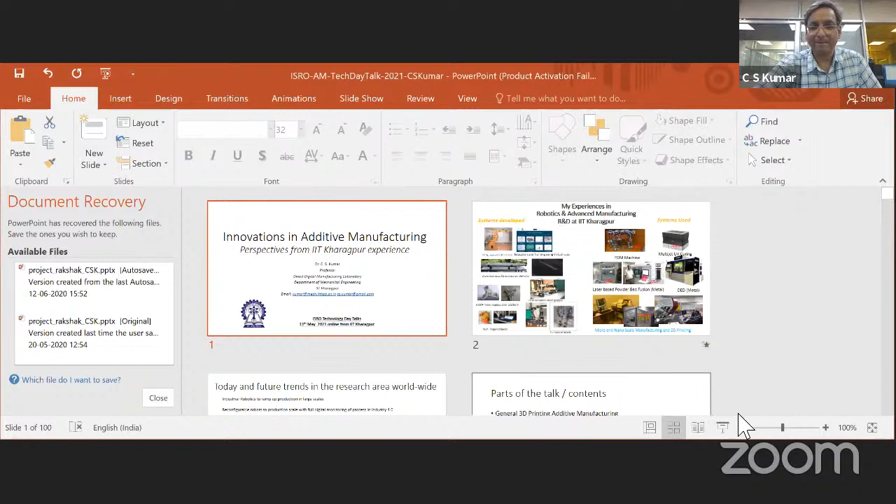Screen is probably a little bit cluttered. There's a lot of slides I've prepared for a 1 hour talk. Okay. Yeah. So this is the topic. I hope you're getting to see my first slide, the title slide. Yes, sir. Yeah. It's visible.

I called it ISRO Technology Day. It's actually the National Technology Day of ISRO, so I perhaps misuse the term. Let me introduce myself briefly. I am Professor C.S. Kumar from the Mechanical Engineering Department of IIT Kharagpur. I am a graduate of this institute in the year 1987.

After my schooling in 83, my first choice, like any young geek, was always the aerospace industry, and I literally fought with my dad that I wanted to join aerospace, but then manufacturing was just upcoming, and we were looking at aspects of doing manufacturing engineering, advanced manufacturing in mechanical. So that was the undergraduate program I joined as a BTech student way back in 1983. Providence took me through it.

And then after several years of work in basic manufacturing engineering, manufacturing science and engineering, where IIT Kharagpur happens to be the first institute which introduced this program at the undergraduate level, I went into robotics and automation. And about 12, 13 years ago, I got into additive manufacturing, due to an assignment that I had been given to work with, and I will talk about my experiences in that.

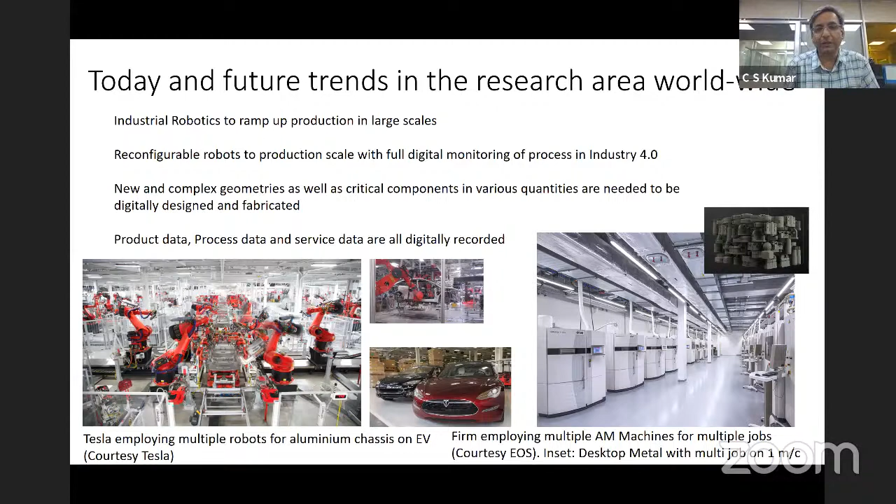So I will today talk generally about 3D printing, metal 3D printing, micro 3D printing, etc. So essentially here we are talking of additive manufacturing, which is also called 3D printing. There's a minor difference between the two. Additive is more like a process wherein you add material instead of removing material, and it actually helps a lot as compared to the traditional secondary manufacturing processes, wherein if you remove material, you incur wastage and you actually spend more energy in doing so. And that's why it is not so green in that sense. Okay.

That's why it is called an advanced manufacturing thing. You can also make very complex shapes, which otherwise traditional manufacturing machines, either a lathe-like machine or a milling-like machine or any combination of these, make very complex to do. And on top of it, like the example I've given, if you have multiple machines, you can work with multiple materials and you can expect different properties from those parts and products made. And you can have a lot of flexibility while doing so.

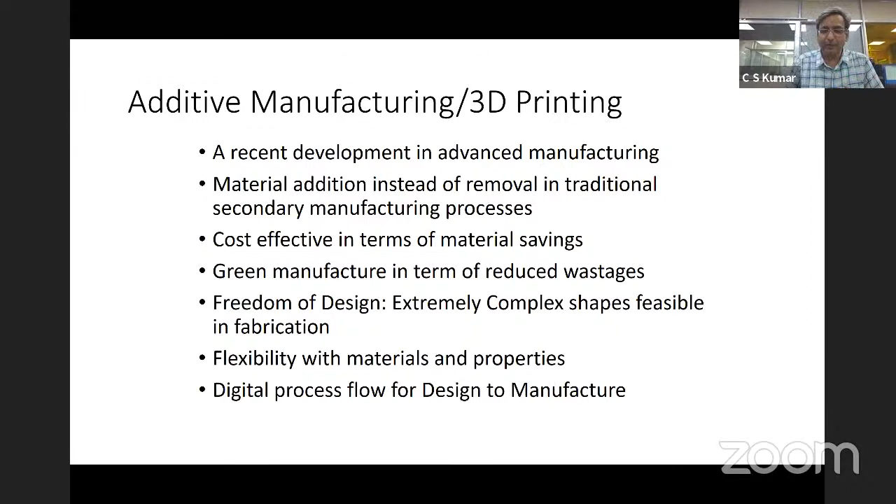And accordingly, you can actually configure or plan your design-to-manufacture process. And this entire thing has become digital thanks to the digital innovations that are taking place these days. So that is the driving thing which makes it possible these days.

I will not get much into this, but there are many families of additive manufacturing. In any typical course on additive manufacturing, we cover most of these. Here I will talk with respect to the one that we have on powder bed fusion, where we have had recent experiences. We do also have material jetting options and UV curing that I mentioned, but the more exciting things are happening in powder bed fusion. There are alternative technologies in sheet lamination, material extrusion, and also there is a directed energy deposition process, about which I will talk because we are getting into it also.

Then there is an 8th category, which is a hybrid category, which may be a mix of these, or they can mix with a subtractive process wherein you traditionally remove material. And that is getting a lot of attention because you have the benefits of both additive as well as traditional technologies, and you get a lot of new things that are happening. And I will touch upon it briefly today.

In general, the transitions are happening like this: you typically talk of digital transformation, wherein you take a CAD model. It would have traditionally gone through a rapid manufacturing process, either on a lathe or a milling-like machine, and then you take it through a heat treatment process and put it on maybe a non-traditional manufacturing process and get things like die inserts made. There are multiple stages you have to take it through.

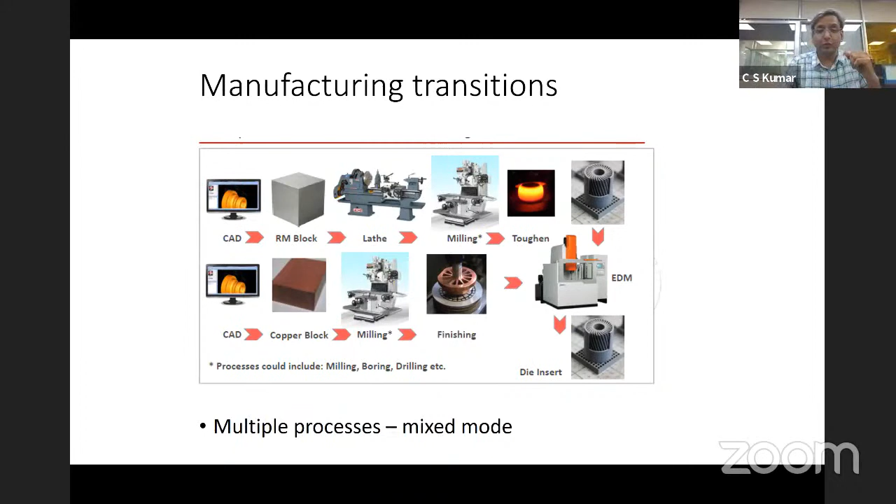So the digital era with 3D printing has actually a very wide spectrum of things. We at IIT Kharagpur have many machines of this kind. This is the initial machine which we called the M270. Then we had laser material processing in our laser lab. Then we have a robotics lab, and then this is the micro 3D printing facility that we have. We have some more, but I'm skipping some of these.

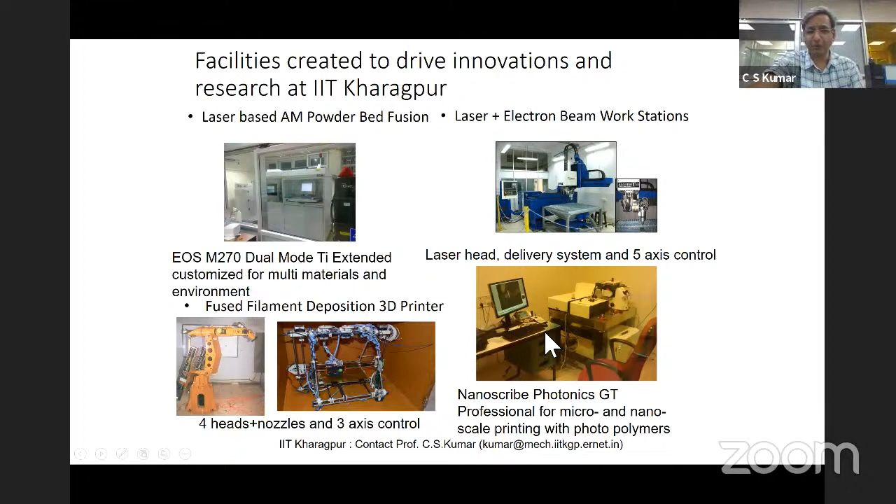I am also in charge of the direct digital manufacturing lab, which was set up in 2009. We installed the first metal 3D printer at that time, when people were hesitant to set it up at an academic institute. And more recently, in 2016, we had the microsystems lab also. And only recently, the one from 2009 has been upgraded to a more advanced system.

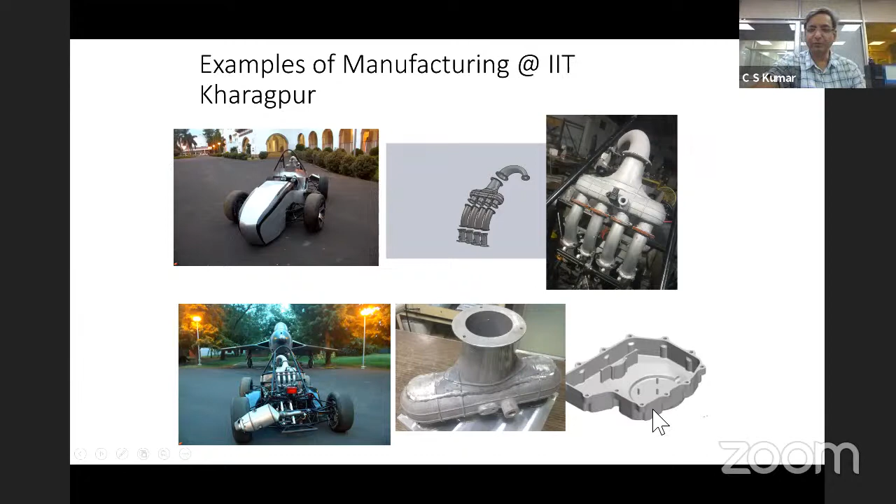We have already made parts for automotive applications, like our students developed these for Formula cars. This is the intake manifold, made out of aluminum. And the chassis, this is for a Formula car wherein this has to be custom designed, and it was fabricated in our lab and made out of aluminum. Its sump was made out of steel. This was also done in the lab.

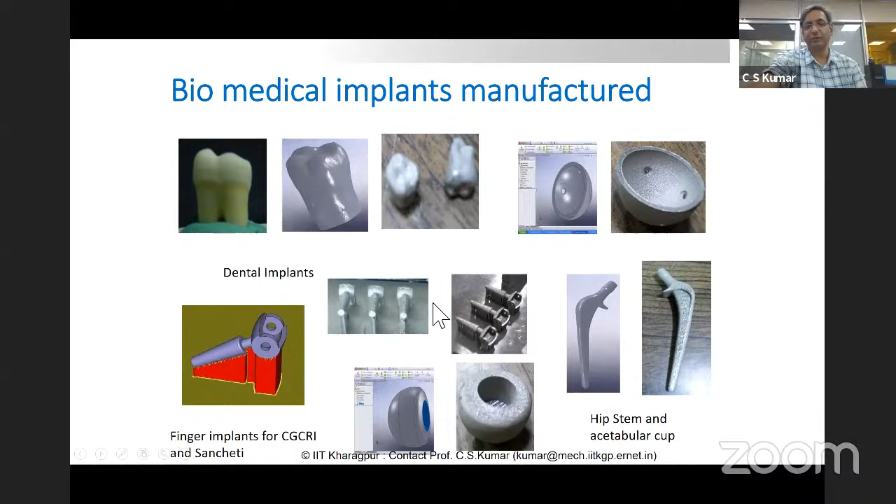You can also do biomedical applications like hip stem implants. These are finger implants. We got some requests from various organizations and we made them. This is what I talked about, the ventricular assist device for a heart pump. And this is made in titanium so that it can be used for biocompatible applications.

So all of these follow what we call a powder bed fusion process. Since I'm focusing mostly on metals, metals can be used directly in real applications in a final product. So there are different ways of doing it. One is liquid phase sintering and another is the full melting process. The other processes are not really as effective, like solid state sintering or chemically induced binding. These are typically used in ceramics, an upcoming technology, but they don't deliver the strength we look for.

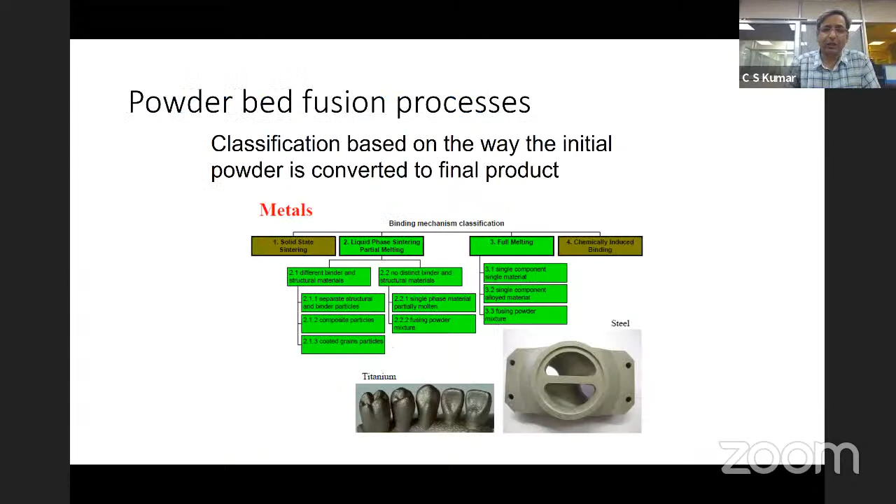But looking at the most viable and commercially grown systems, they could be either liquid phase sintering or full melting. We work mostly on full melting based systems. We use a technology called direct metal laser sintering, DMLS in short. Basically, we do layer by layer addition, wherein at one end you have powder, which is passed on to a build chamber through a recoater.

The recoater puts the powder on a bed, and there's a laser beam, typically of very small diameter, about 80 to 100 microns, and it may have a power ranging from 200 to 400 or even 1000 watts. When you apply it on a very small area, the energy density is so high that it melts the powder, and when you switch it off, it very rapidly cools and binds to the substrate, making a solid part on the previous layer. Then you do this layer by layer, lowering the platform and letting new powder be spread on top. So this is how it goes.

We typically start with a CAD model, then you have powder, and the CAD model can be very complex. The complexity does not matter. Then you bring it to the build chamber. In the build chamber, the powder is first coated by a recoater in a thin layer of a few microns.

And then use a laser beam to melt and solidify only that portion of the CAD model which is relevant. The rest all is left untouched. And then when the material melts and solidifies, you go back and you put another layer on top of it, and you continue this process layer by layer, and as you keep on adding, you will complete the part like this.

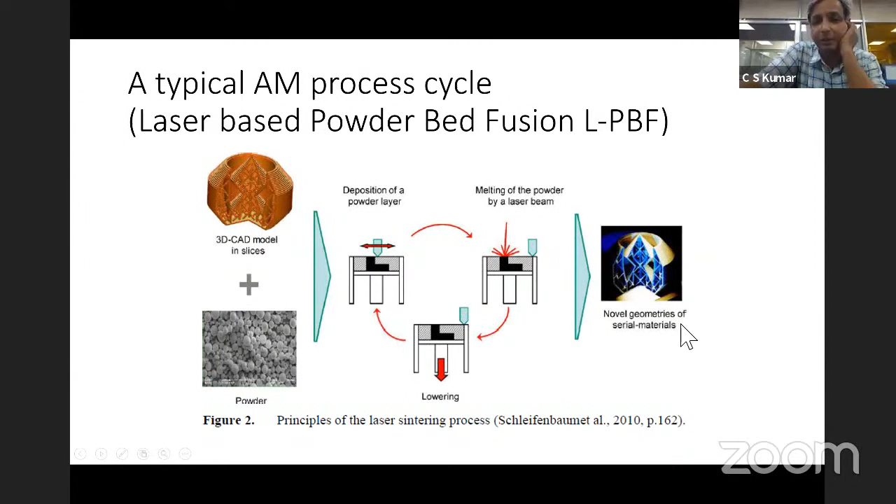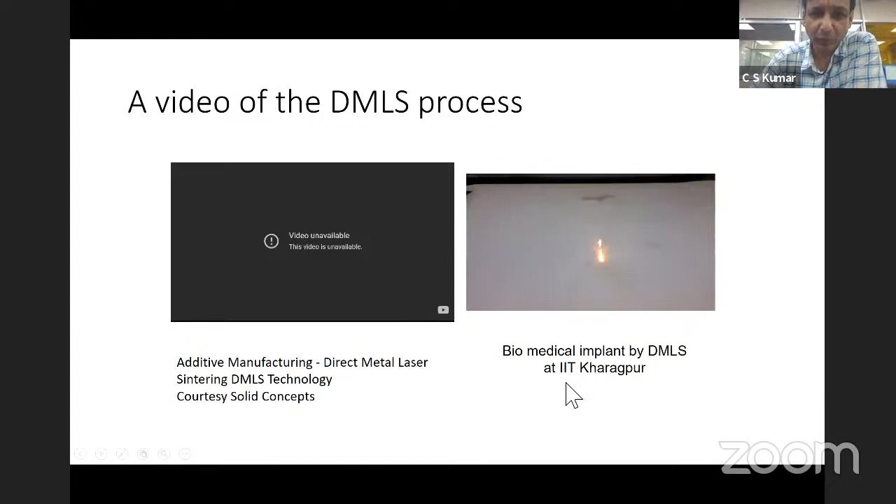This is what we call additive manufacturing, which is a very state-of-the-art manufacturing. It was earlier called rapid prototyping. It was earlier done for making parts with very complex geometry. It may have inside structures, like there may be paths or cavities or even channels which may be used for cooling and other things. And you can make them in this process very easily.

Conventionally, it is very difficult to make dies and inserts for achieving this. In an additive process, it's much easier to do that. What I've shown here was for metals. You could work on materials like stainless steel or reactive materials like titanium or even aluminum, or high strength materials like cobalt chrome or H13 steels, etc. There are people who have worked with precious materials like gold, etc.

There is also equivalent work going on polymers, which I will not touch upon. I think there is a separate talk on that. A typical flow would be to take a CAD model from a software. Then from the CAD model, we create an STL file, which is a set of triangles which represent the outer surface; it's a boundary representation model. And from there, you slice this into a format wherein you do it layer by layer.

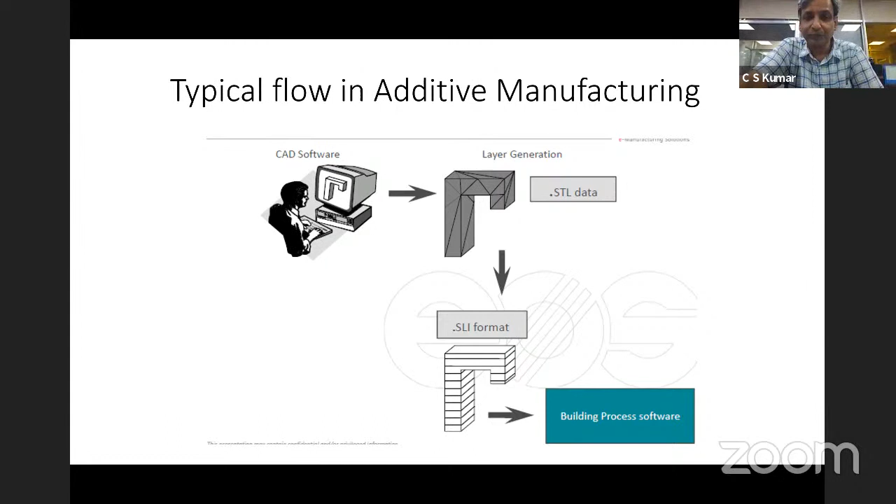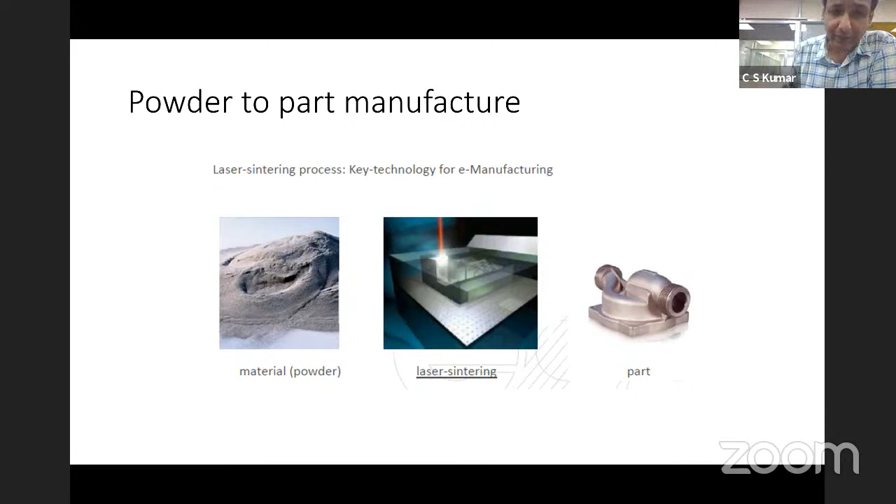So our machine being from EOS, these are examples I've taken from there. So you can actually make a complex part like this, and you can see how it is being built here. In the interest of time, I will skip through some of these rather fast. So this is where you start with the materials, powders, and go to the part. This is also called selective laser sintering. Some call it direct metal laser sintering, and so on.

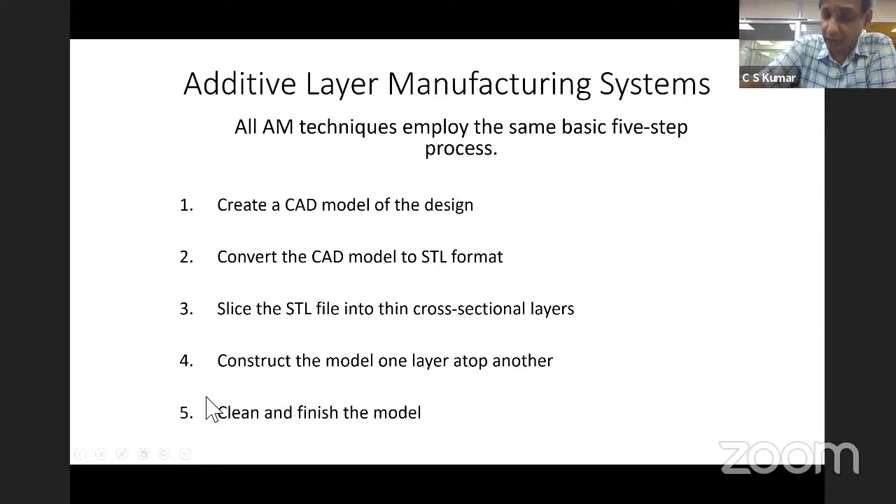Just to give you an idea about what happens in the software stages, you might pick up the model sometimes from very complex shapes. Like a CT scan can actually create data of, let's say, a human implant or skull data or things like that, a human orthopedic implant, which can be very complex in shape. You may not have a well-known geometry to define it beforehand. So the CT scan actually extracts that, and then you can recreate the geometry in 3D and bring it into a CAD software by reverse engineering or redesign, and then you can optimize and create a shape.

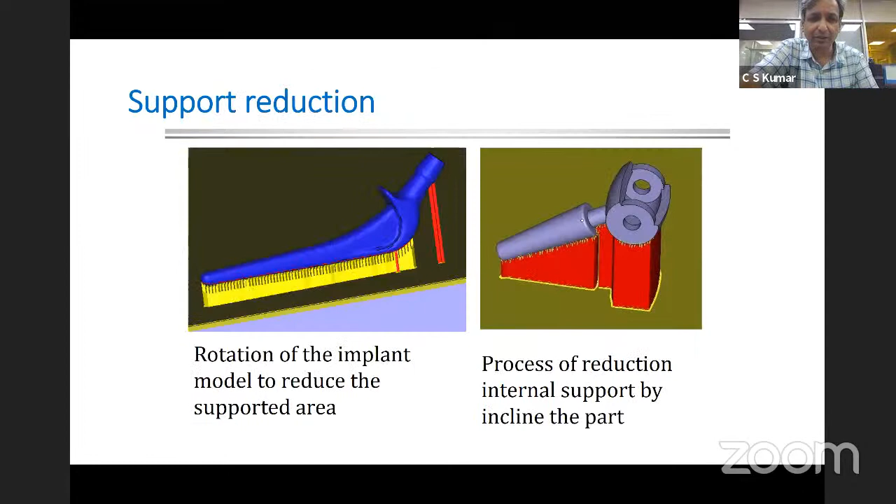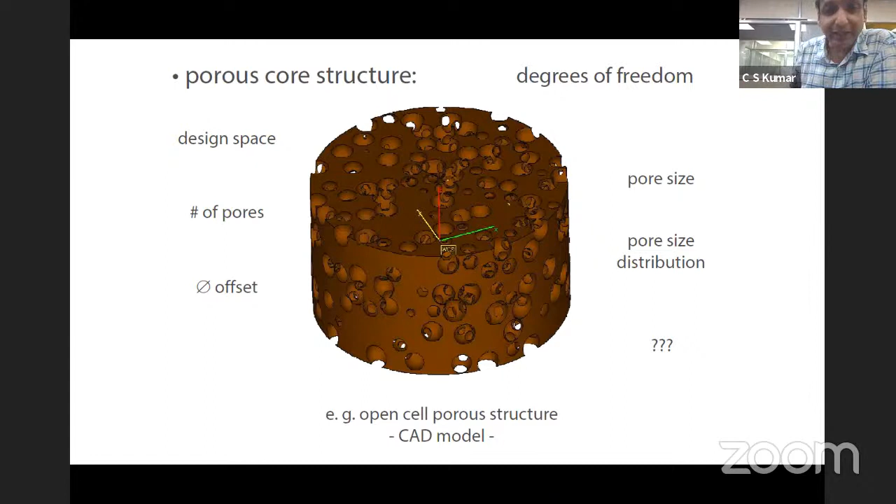This is an example of a porous structure wherein you can create pores inside a material. You can control the shape of the pores by bringing in a CAD model. This is called hybrid modeling. And you can bring in, let's say, something like bifurcating arteries, embed that into a design, create a porous structure very easily and then just pass it on to manufacturing. These are very useful when you're working with biomedical systems, wherein the shapes and structures are very odd, and sometimes you need the porosity because bone or tissue structures grow into them and make the structure more stable for long life applications.

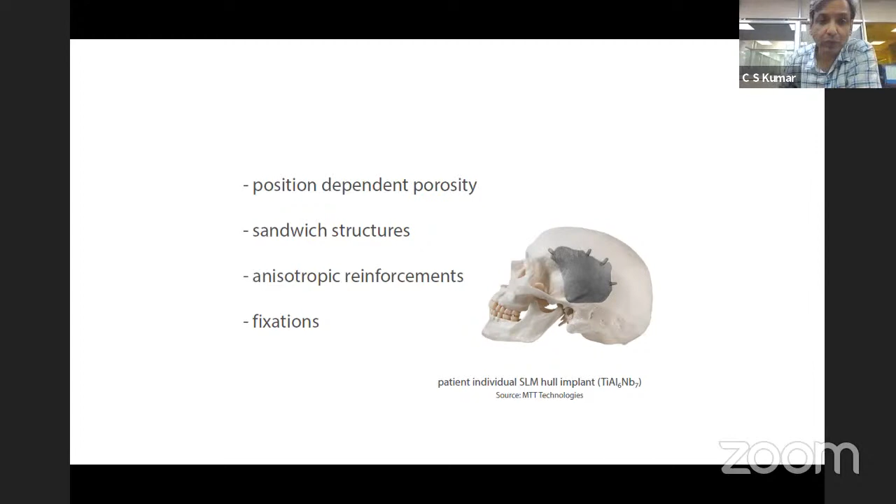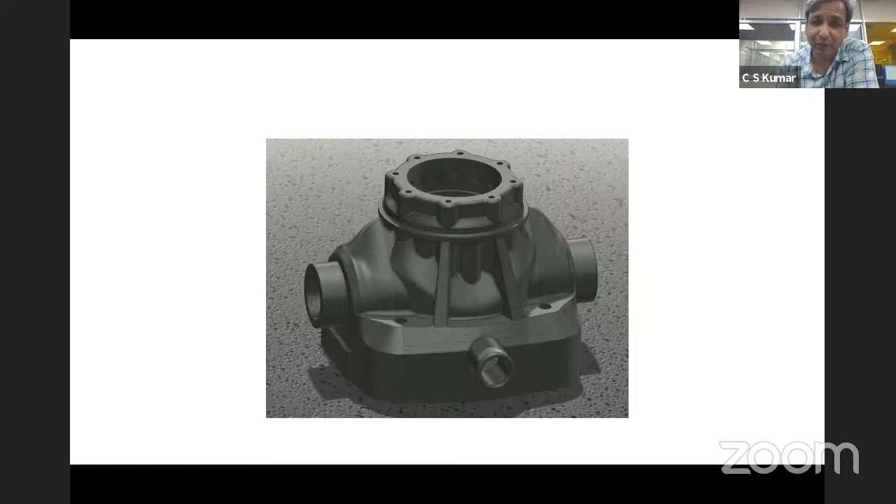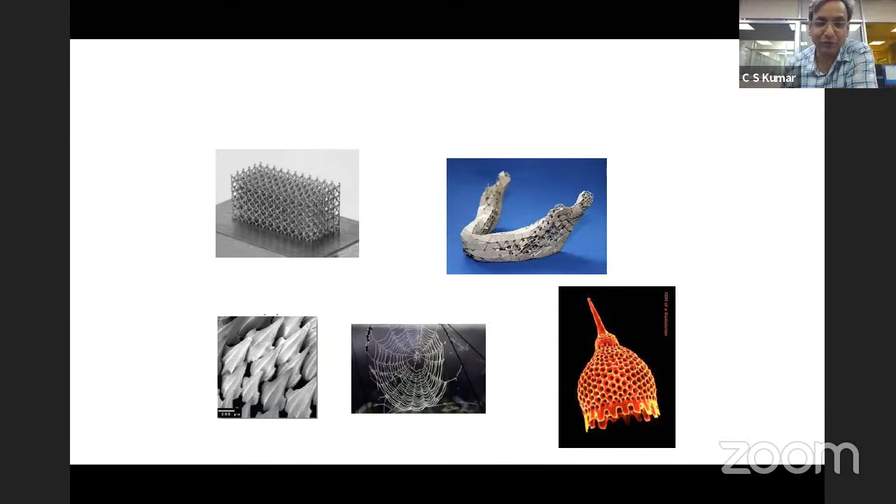These are innovative structures people make, sometimes for artistic applications, but you can see how a spider-like web is useful for capturing something. So they actually make it additively. That's a very good example of how additive structures are made for real-life usage. This is what has led to what is called topology optimization. Topology optimization allows us to keep minimal material and give the adequate strength that we are looking for. Here is an example of a frame typically used for aerospace structures, because they want to reduce the dead weight carried in the aircraft, and you can always optimize that by these methods.

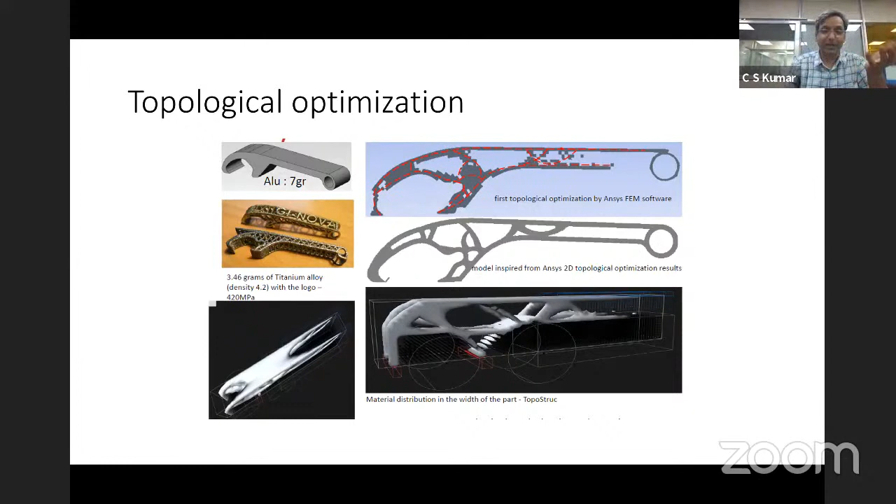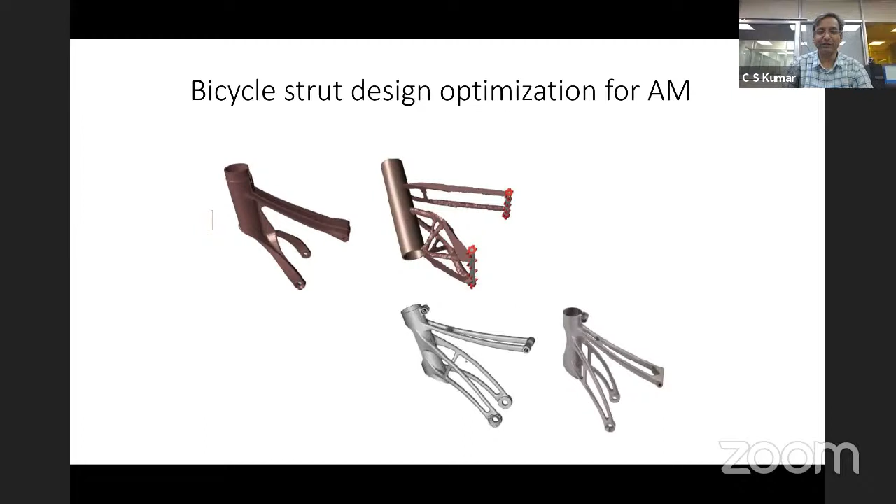Usually we do it by the FEM method. Where there is no stress and the material is not contributing to the load, you can remove it and get a shape, and you can save a lot on material in this process. This is a titanium bicycle frame made by Renishaw for their bicycle. You can see this in videos. They made a very simple, very lightweight one. I have seen this bicycle; you can literally lift it up with 2 fingers. It is so light. Of course, it's made of a material like titanium.

This is another one to generate a shape. You can see the top here. This is a solid conventionally manufactured thing, but if you topology optimize it, you can get a very complex shape, much lighter in material.

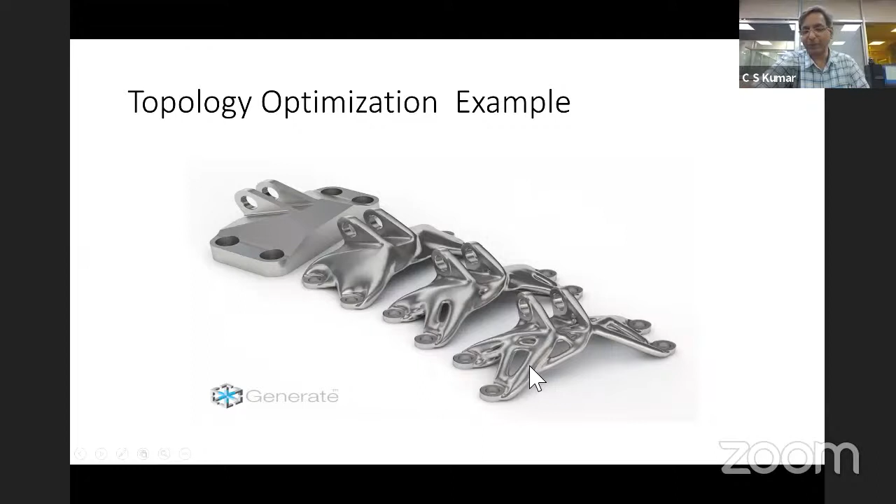Another such example, which is floated around. These are all picked up from industry examples. We haven't done these here.

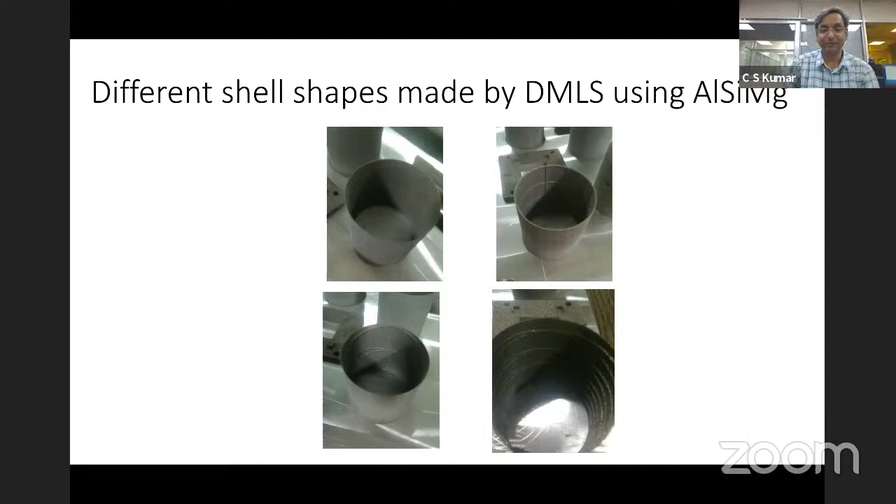So you can also do it for supports like this and create support optimization in this process. This has led to what is known as a product cycle, which is an additive manufacturing process chain. Today, many people are involved in this and they have modeling and simulation included into some of this. I thought of bringing that in this talk, but given this time constraint, I'm going to cut it short.

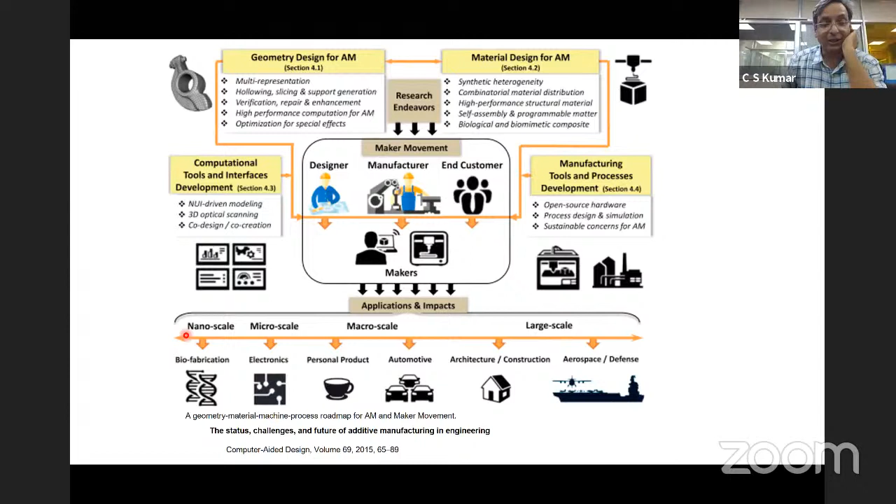I think I will overshoot time a little bit beyond 3, but then I'll try my best to cover a few of that in the interest of everyone.

So what it has led to is we are going back traditionally to what is called craft manufacturing, wherein the consumer and the artisan work together to make a product. When the industrial revolution made these go through factories and standardized products, today direct digital manufacturing brings personalized products in a local manner, and it got facilitated because of these additive processes.

So when we do this, in a lab like our institute, we look at a variety of things when we implement it. What we do at our institute, we look at a typical process and say what are the contributing factors in it, and each of these factors we then thoroughly experiment with to optimize the product. Like in this case, if I'm doing anything with a laser-based process, powder bed fusion, it depends on things like the laser power, the scan speed, the hatching distance, and scan strategy.

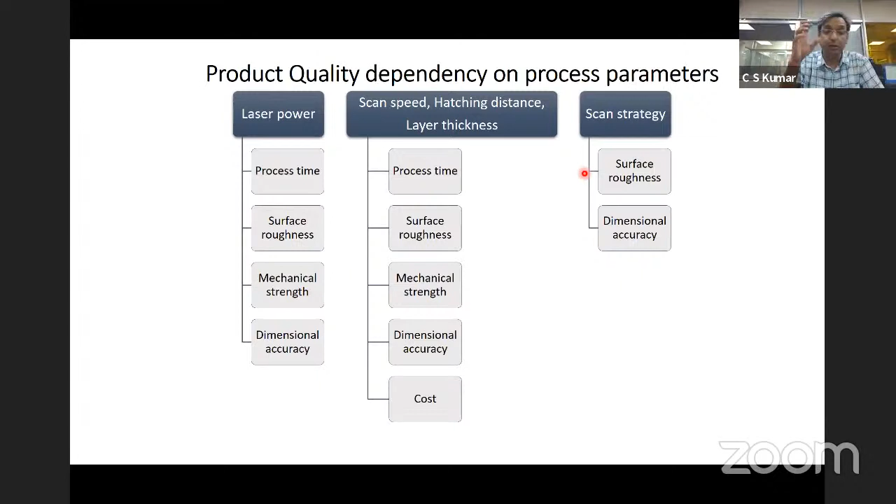And they influence the process time, the surface roughness, the mechanical strength, dimensional accuracy, and other kinds of aspects of the product. And then if you interplay between these, we know which is the right combination of these parameters which will give you the best quality output. So we create models of this by laser material interactions, and these allow us to actually get deep into what will be the final property that you will achieve.

So there's a lot of optimization involved in it. Sometimes you increase the power, sometimes you increase the deposition rate, sometimes you increase the feature quality, and there's an interplay between this, and you have to choose that sweet spot which brings up what we call a process map, and that process map becomes relevant for us to implement as a recipe which goes to the industry, and we are involved in doing that.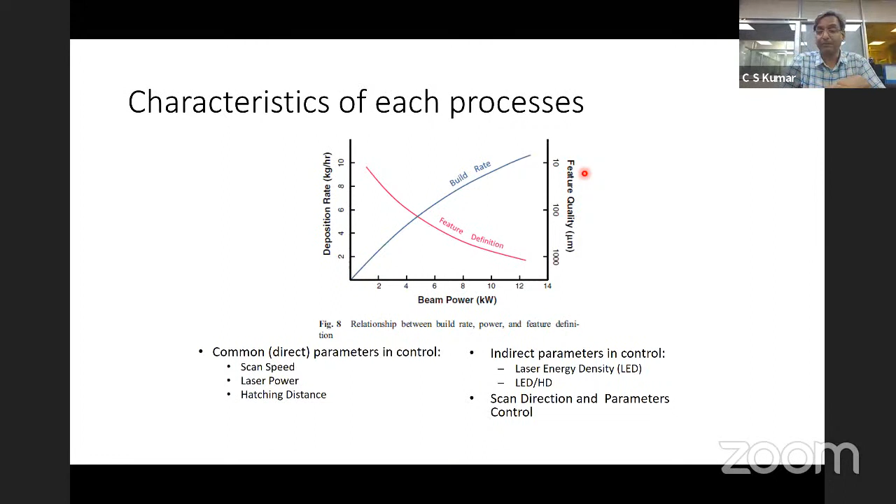So to do that in our lab, we have used these machines and we have rigged them up with all kinds of monitoring processes, which allows us to say what happens inside the process when the part is being produced. So towards that, we have this laser-based manufacturing process that you see.

There are snapshots that we take through a thermal camera, and we can detect from that what is happening in the process. Sometimes it does not go as well as planned, and it may introduce defects. So we look at defects by looking at the intensity of the laser energy, which varies with the various process parameters that we change, or the spatter, which shows what height that plume is, and whether it is ejecting too many particles, or it's likely to create more errors in the job. Like there may be pores, or there may be lack of fusion faults. So we need to capture them early.

So this was what we did earlier, and we got some interesting results out of it. Later on, we went into upgrading the machine so that we can capture these more systematically in a very professional manner. So the upgraded machine has a camera which captures this at one end, and it has a set of laser diodes that we see here, which monitor the back radiation, and they give an impression of what the temperature is on the build screen.

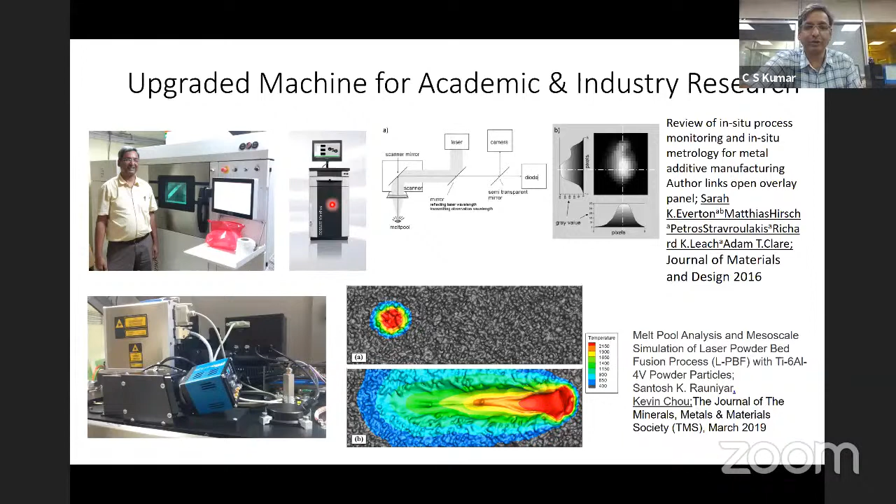And then you can reconstruct and see how the melt pool is forming, and that melt pool forming and cooling rate will tell us what property you are going to achieve in the process. So we monitor them through devices like this, which allow us to capture all this. So this is what we call in situ monitoring.

Like you see a typical thing here, I'm doing a job of a BHEL turbine, which is a closed impeller. And while it is being manufactured, we collect data of it through a camera, the CMOS camera, which gives us a picture of the bed, as well as a scanner, which tells us what the temperature is. And then we reconstruct that on the right-hand side here as a video.

This is playing a video, I think. I don't know why it's not coming here immediately. Okay, so we can reconstruct that at this side. Here is the video, yeah.

So we actually capture here the various backscatter images, the radiation on this screen, and here is the thing. This is constructed from whatever is happening on the job, and you can do it layer by layer. And when you capture this live, we can then use it for reconstructing the job and look at whether there are possible defects. So this is how we started.

We started with a CAD model of an impeller here. It had internal support structures, and these support structures are needed because the manufacturing system will fail otherwise. But when you make them, you don't like to keep those structures. You have to mill them out or remove them.

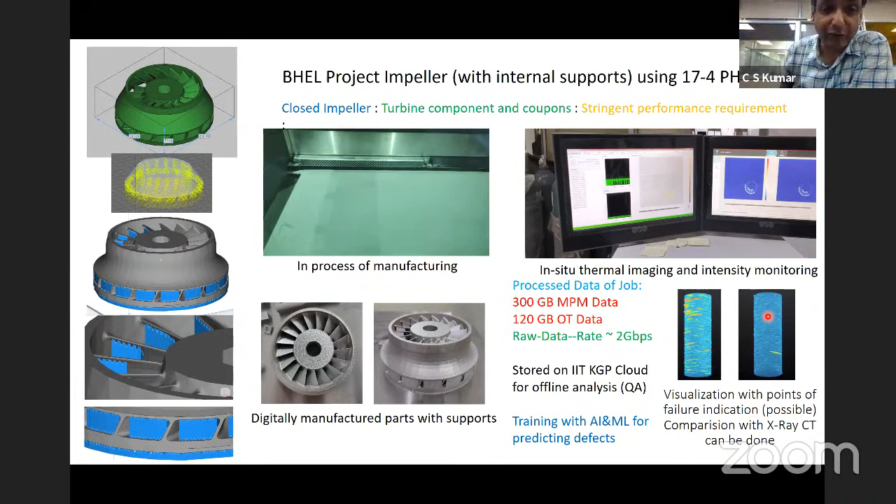They create a problem. So we collect all this data, analyze, and see where there are possible hotspots or things which may cause problems, because these impellers by BHEL will be used in plants, and they are supposed to have a long life of 15, 20, maybe even 40 years in gas turbines, and you cannot afford them to fail. So you need to have a very perfect part being made here. So what we do is what is known as optical tomography.

We construct the body. Let's say this is a coupon that we made, and we know what happens at the base as it builds. So this is a reconstructed image. And in the reconstructed image, we know at the interface between the support and the body, there is a lot of high energy temperature developed there, and it is prone to failure at that point. So we are devising ways of minimizing this kind of thing for when a body is put to use.

So we reconstructed for the same job that we see. Since we did this, we could actually build this up. This is not on the same scale as what you saw there, but I can see here the supports as well as the internal ones, and I can examine this at any cross section and then come up with alternative recipes to achieve this. This is an example which shows where the likely hotspots and chances of having defects inside the part are.

As I said, if I put this to use in real life applications, you don't want this part to fail. It has to withstand a long life of maybe 40, 50 years in turbines, and the failure expectations are very low there. So it's pretty challenging to do it by this method.

We depend a lot on international technology, but hoping that by doing this, we will be actually coming up with our own technologies to help this out. While this is a technology, what I call as the laser powder bed fusion, there's an alternative technology that we are exploring, and I mentioned there is what is called as direct energy deposition.

Direct energy deposition here allows us to also deposit the metals along with the material from a nozzle, as well as from a laser going along with it. This is not a powder bed system, and it is something which can create odd shapes. This machine we are just getting, it somehow could not be installed due to certain problems that we had in our delivery. On the right side, there is also something which is a similar kind from the same company, which makes printed electronics. We don't have this at our institute, but I will talk about something related to it in a few minutes.

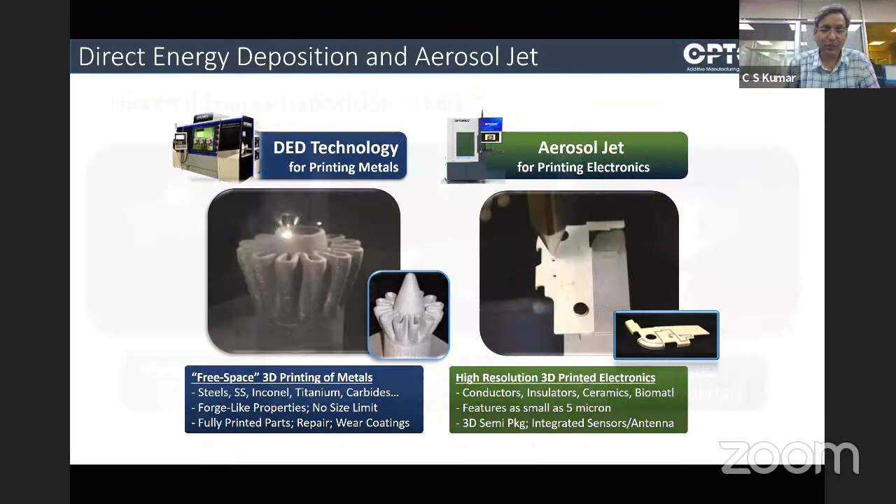So this is typically you fabricate here with the machine that we have. It uses something called LENS technology, that is laser engineered net shaping. They trademark that like DMLS, and then that can make parts on complex geometries like this. This is a fabrication application. You could also use it for repair. If something is damaged, you can only fill up that part which is damaged and repair it. You could do a hybrid process wherein you can make and machine it also. And that's what we have actually procured in our lab. It unfortunately could not be installed because something happened during shipment, and that is going on right now.

This is the repair process, how it is being done. Okay. And this is a hybrid process wherein you actually manufacture and also machine after that. Once this is completed, machining, this is a deposition process. After this, I think you will see a machining process also taking over on this. You can create a complex shape, and then you will see here a machining also done to remove all the excess material, and you'll get a good surface finish also here.

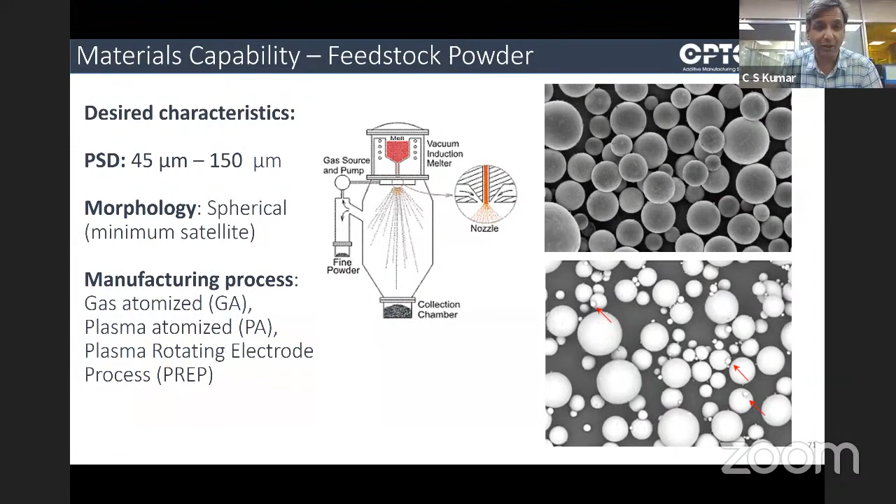So it is generally done in controlled and inert atmospheres. This is what we have at our lab. We got it in our advanced manufacturing center. Yeah, it's not yet installed for functional, but we are already practicing with its software and working with it with several scholars working on it. They have a lot of capability of bringing in different kind of materials. Generally, we use powders of different kinds. Here, the powder sizes are a little big, and build rates are also very fast as a consequence. So you can actually work with, again, same materials like stainless steel, nickel, copper, carbides, and titanium and other materials also, which is now happening.

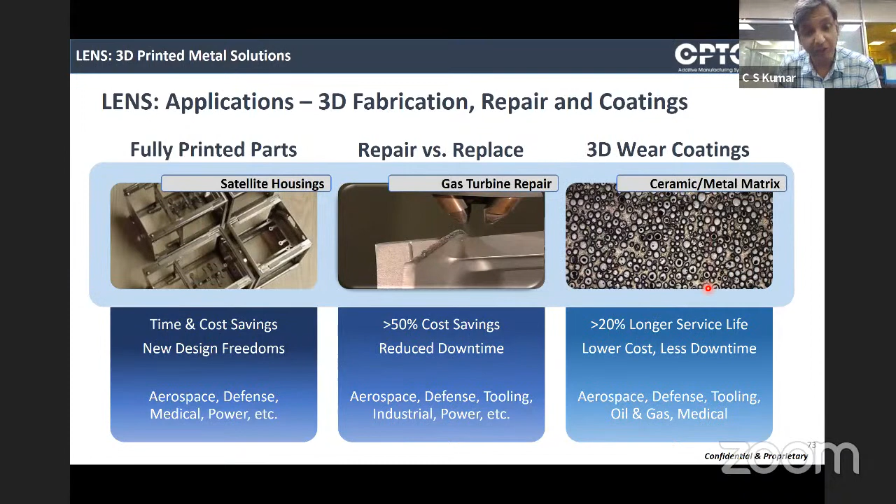Here are a few examples of these. People have used it for satellite housings. I heard ISRO is having some of these done here, not in our center, but elsewhere. Then repair and replacement, it is possible. And you can have metal matrix components also. You can mix materials and create in this also. That is another advantage of this process. It allows us to make many parts of extreme complexity. Conventionally, it is otherwise not easy to make.

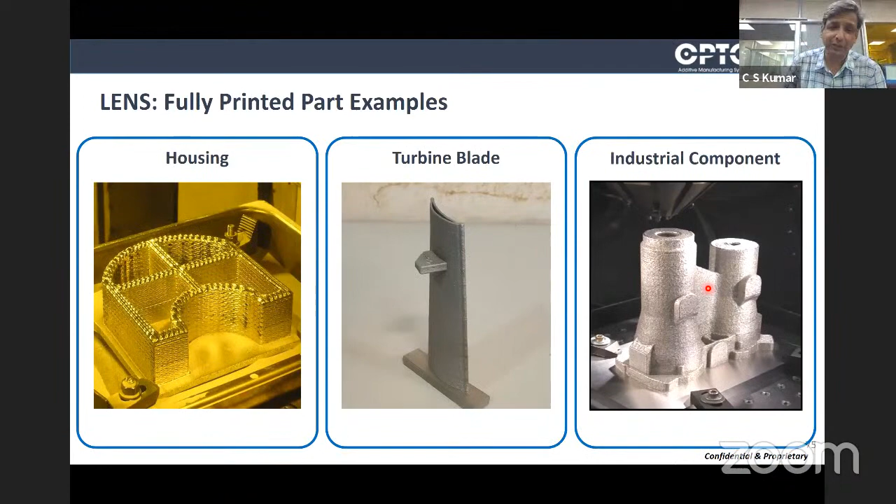So here again, similarly, housing, turbine blades, industrial components. These are generally you'll get very bad surface finish here too, like in powder bed systems. But if you have a hybrid system, you can machine it and get very good things here also, like here. Few more examples of this kind. These slides are from the company Optomec. I thank them for providing these slides because our machine is not yet available, operational. New materials are also being developed on this. And you can have carbon nanotubes, CNTs, carbon nanotube reinforced nickel alloys, boron reinforced titanium alloys, and all possible on these machines also.

Then I talked about printed electronics. Today you can actually print something on electronic materials, you can make sensors, you could do packaging, you could do antenna. We tried to do this with the FDM process, but there are a lot of things we can do internally with similar processes also. You can actually put in ink onto materials, and the inks, conductive inks, or they could be also materials of different kind, which can mix with the different matrix, and you can have electronics also happening in this process. So these are called electronic ink, which are actually small droplets which are aerodynamically focused, and aerosol jets are deposited, and you can create these also. This is another innovation that has taken place. It is coming from this company called Optomec.

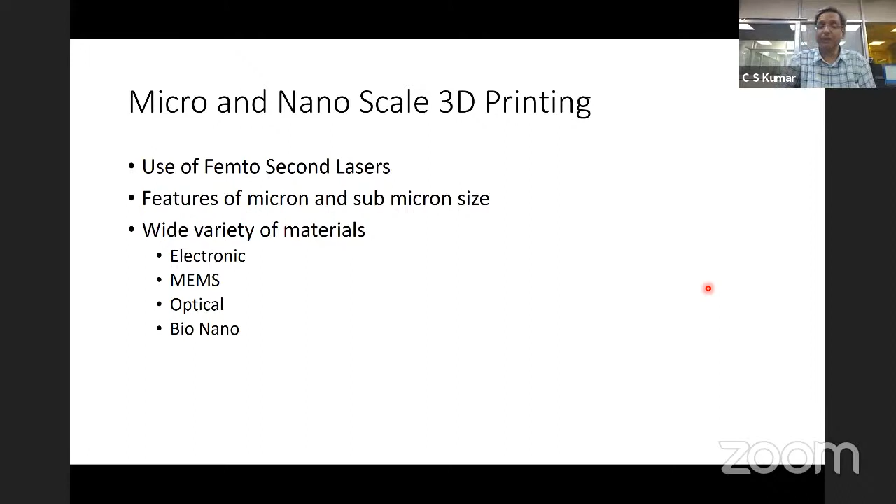What we do at IIT is we work at micro and nano scale. Maybe I'll just take another 3-4 minutes and wrap this up. We can print things using femtosecond lasers and make parts at extremely small scales. I call that micro and nano scale printing. We can use it for various materials, not necessarily metallic ones like I mentioned. They can be electronics, they could be on MEMS, they could be optical, and even bio nanomaterials.

This is a setup which we have got from Nanoscribe, a German company, wherein you can actually achieve feature sizes of the order of 1 micron, and the resolution is down to 200 nanometer, which is the feature of the laser that is used here.

So here are 3D scaffolds made at nanoscales. Their applications tend to be like scaffolds for cells, which may be used for capturing bioorganisms like they do in COVID or other things, and then they do tests to characterize what it is. It could be used for micro-optics, microfluidics, MEMS applications, maskless photolithography, or, most popular, 3D photonics and wire bonding in optical integration.

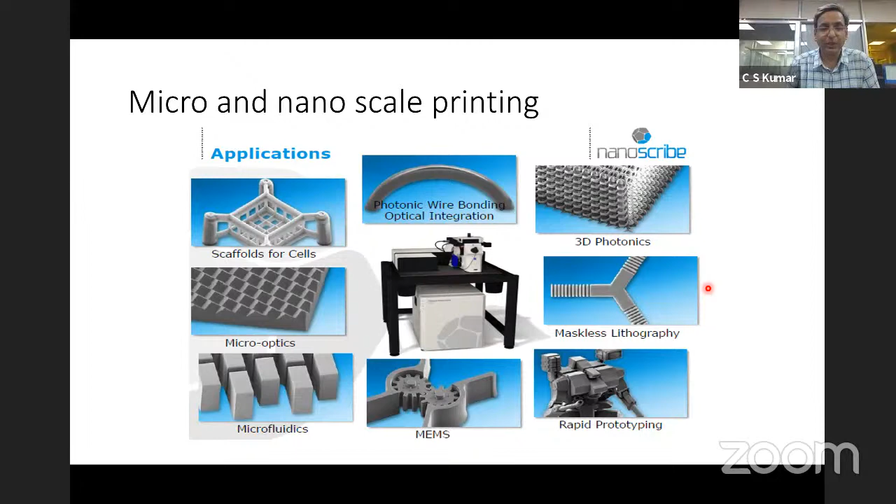So it uses a technology called direct laser writing, wherein you focus a small beam of light and you modulate its intensity and amplitude by a process called 2-photon polymerization. It's a near infrared laser having a wavelength of about 760 to 780 nanometer, and at half its wavelength you get its resolution. You can work with photoresists, positive and negative, and you can write on top or use a dip-in laser process. The voxel size is 200 by 200 by 300 nanometer, and you can directly build parts in 3D.

There are people who worked on this and made micro robots, like ETH Zurich has made micro robots which can swim in the body and deliver drugs at remote places for cancer-like treatment, etc. These are magnetically guided robots. We are trying to build some such things. Whenever you make these, you make a large number of them in the same build, and they can be done very easily on this. These are called magnetic helical micro machines. They can be fabricated, and we have been making some of these in our lab.

Here is how this thing works. This one I picked up from the internet. Here is an example of how this works. Cut down the sound.

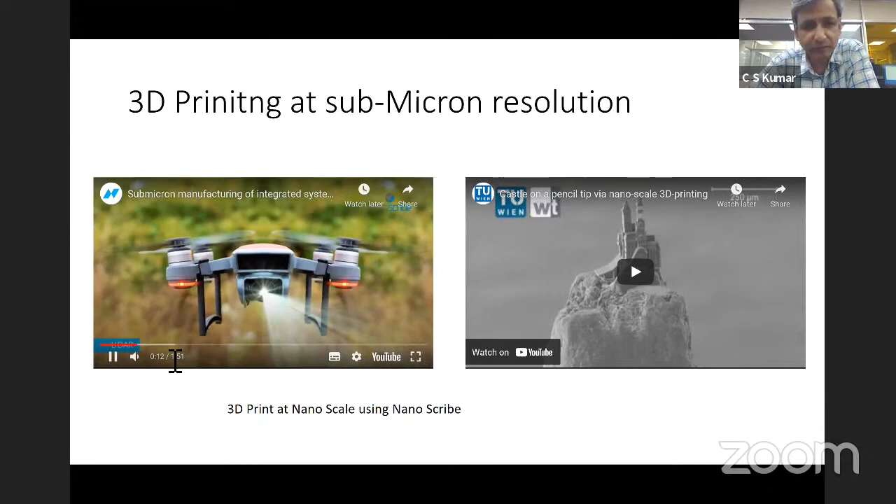3D printed. The miniaturization of optical and mechanical components, as well as fully integrated devices, can bring great benefits. Today, additive manufacturing.

So you can actually print a structure on top of a chip, and you can create optocouplers on the chip.

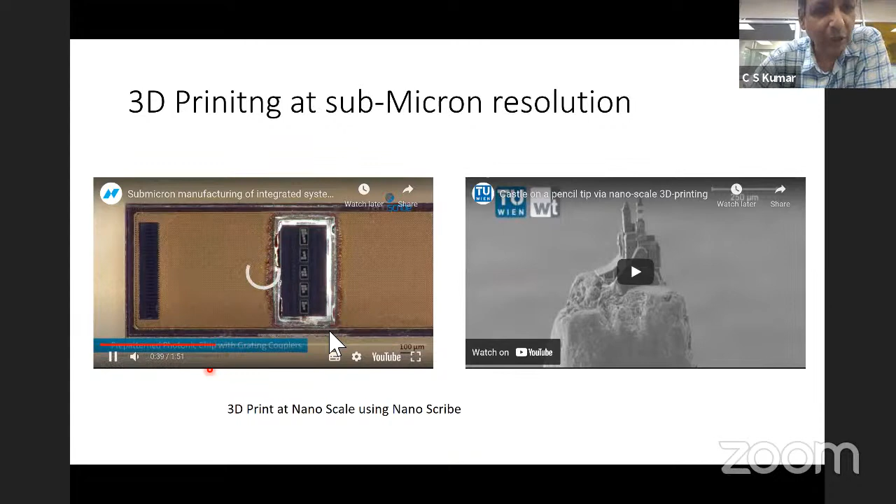Okay, I think the internet is slow, it actually makes some of these videos a little slow. You can check videos on this on the internet. There is another example of how this has been used to build a small castle-like thing.

The following video shows 3D printing of a castle via multiphoton polymerization technique, also called laser-based 3D printing. This was done at TU Wien, Austria. The laser scans through the volume of photosensitive material. Locally induced photopolymerization solidifies material in accordance with the 3D model. Once a layer is finished, the laser focal plane moves to the next layer. The true 3D capability of the method eliminates the need to deposit material layer by layer. Due to non-linear absorption, spatial resolution in the submicron range can be achieved. Scanning electron microscope image of a castle printed onto the tip of a pencil.

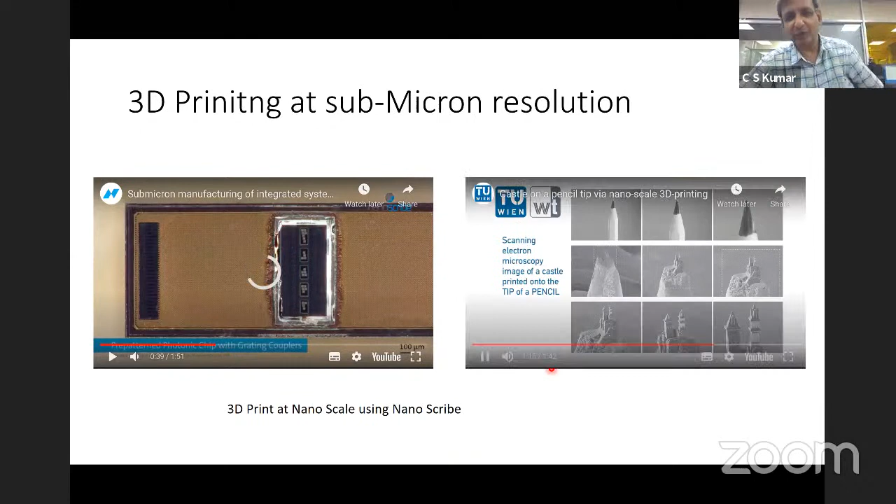So this is to give you an idea of how they make things at such small scales. Okay. For lack of time, I'm trying to skip some of these. So what we do with such machines is we are making micro nano robotic systems, tips of AFM manipulators. We want to use this with micro platforms. This is because of my robotics background. This is a part of a swimmer that we are making here.

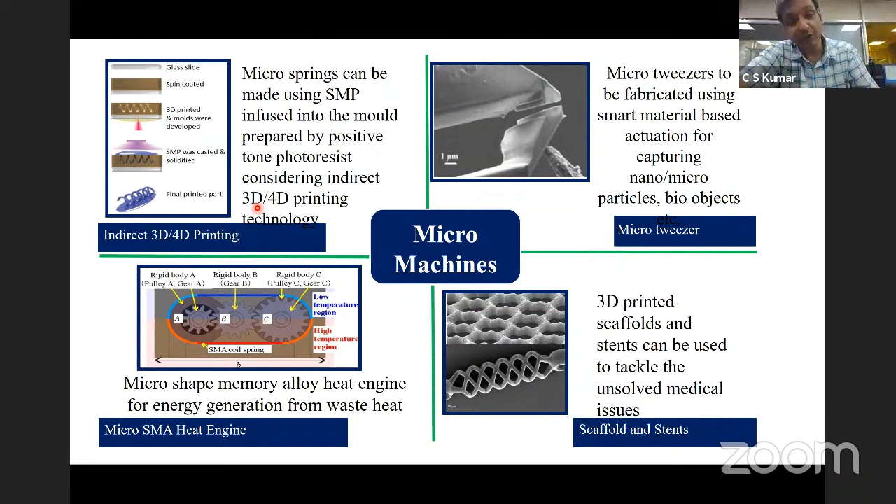Then we are also trying to make micro tweezers, a heat engine, scaffolds, stents that could be done by direct or indirect 3D printing processes, and create micro machines, which are the things of the future. You can actually build the machines in 3D.

Other group members: this is the group. Professor Bhakta from the physics department works on micropillar cavities with this, and they make very fine cavities for optical resonators that are useful in different applications.

So this is the kind of stuff that people work with, and this is to give you an idea of what we have done. As an example, I did it a long time ago. We have our main building here, which is the Institute's tower, which is about 10 stories tall. We made a 3D model of it, and this 3D model was 3D printed and seen in a scanning electron microscope. You can see here the scale is 20 micrometers, and all features inside this are of the order of a few hundred nanometers, and these are useful for making sensors that can be used in MEMS devices.

This is another resonator microcavity pillar made in 3D. Okay, this uses the other technology in the same lab. Yeah, I think this went out of order.

So this comes to my last one. In summary, 3D printing and additive manufacturing is triggering all kinds of new innovations. It is slowly maturing, wherein a lot of digital connect is taking place from design to manufacture, much more than what we have seen before. A lot of new materials and processes are involved. A lot of new exciting technologies are coming into the workflow. And when you add modeling and simulation with geometry, materials, and properties, its adoption and the confidence in its use have increased a lot today.

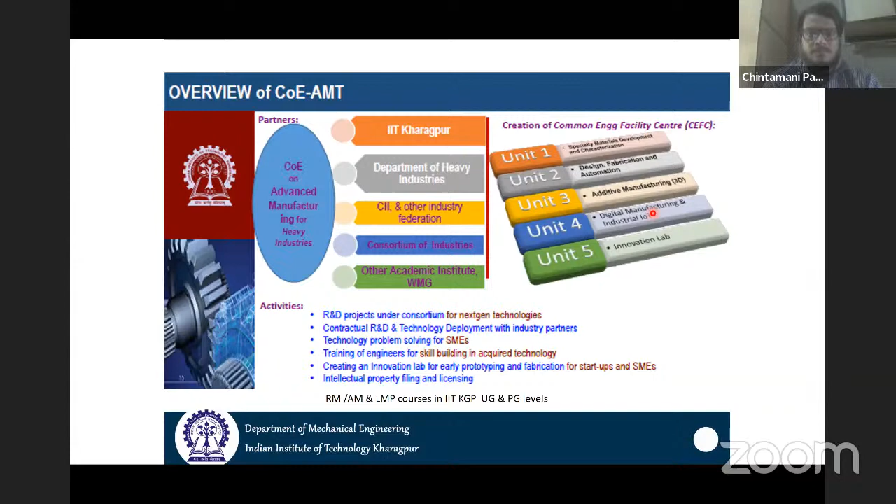No direct question. I will ask one thing to Professor Kumar. Nowadays, we are making a lot of these mobile telephones, and I think there's a plan to make microchips in the country. As you said, you did some work for NavIC also from SAC ISRO. So, what is the status as of today? Can we make these mobile telephone chips in the country? Is this technology available, and how much role is there for mechanical people in that?

Thank you for the nice question. I will take this in two parts. Part one is the chip making itself. The chip making process is a process wherein you typically work with building the electronic circuits inside, typically done on silicon wafers, and you make the devices on it using conventional manufacturing, which is a mix of etching and lithography and other processes to create the devices inside. That is very much a high-tech area of electronics manufacturing.

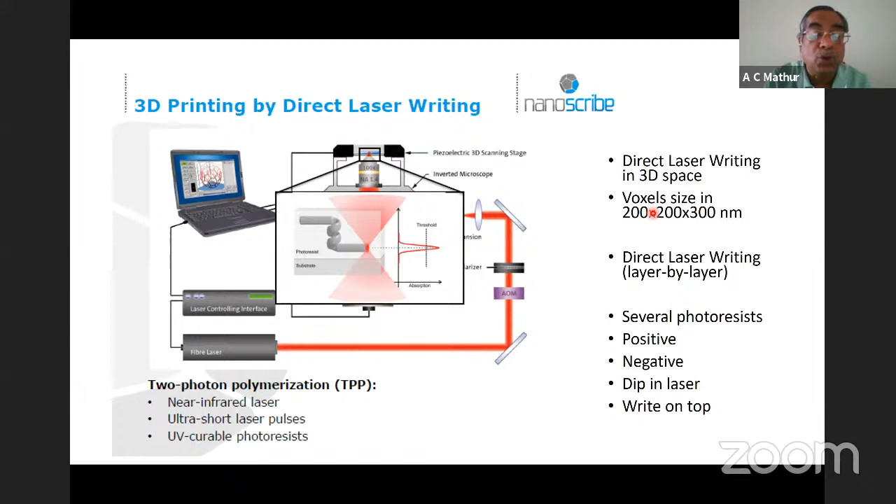Okay. Thank you, sir. Hari, are there any questions on YouTube? Ask Amritanshu whether he's watching YouTube. Okay, sir. There is one question from YouTube.

A student wants to ask what kind of designing softwares are used for additive manufacturing? Today, practically all kinds of CAD software that are available can be used to do additive manufacturing. Most of these are commercial, like SolidWorks or AutoCAD, now Fusion 360. Then you have CATIA. Siemens has got NX CAD, and they all go all the way up to manufacturing also. Today it is happening a lot.

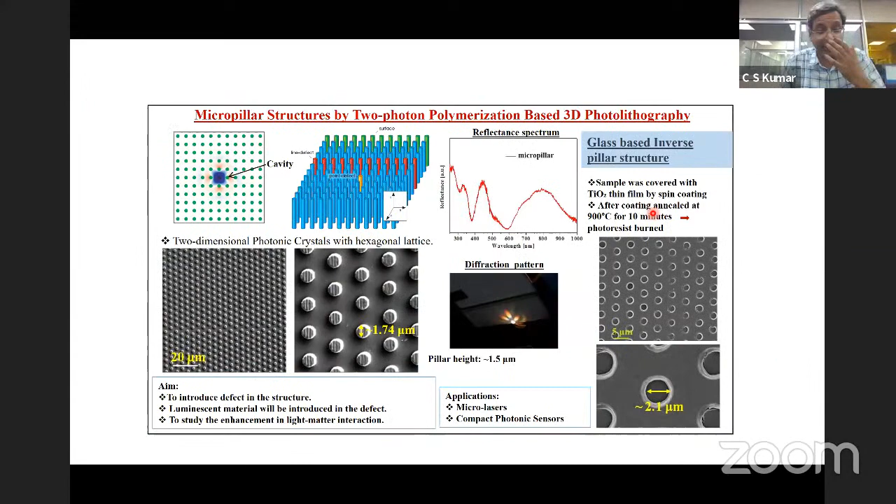You have open source software also, free to use, CAD software which can do this, and you can do 3D printing at home. Cura is the printing software, and the CAD software is FreeCAD. There are many of these available these days, and we use them in our labs a lot, for first year students, etc. You can do it at home. You can learn a lot in this process.

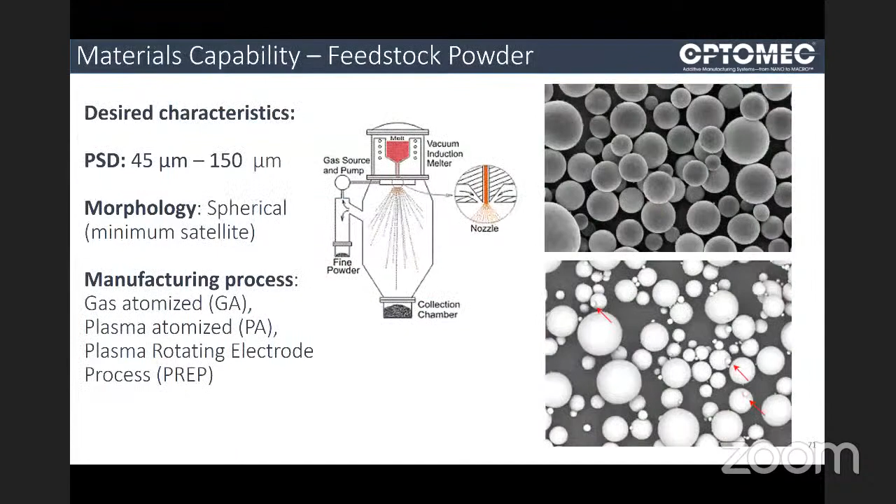I think basically we need any CAD software which can convert the file into STL format. That's right. That is what 3D printing accepts, the STL file. Yeah, but there are many softwares today that can do it automatically. So CAD is the first stage, and CAD software will do that for you.

So my last slide was about the Advanced Manufacturing Center. I forgot to talk about it, but the Advanced Manufacturing Center here has all these facilities and many more. You can look at this site and update yourself on what more you can do here. It's a government supported center of excellence on manufacturing for heavy industries.

Are you doing any work for our launch pads at Sriharikota? Has ISRO ever contacted you? I don't think anybody contacted us. We put one proposal for making those storage hydrants, 3D printed, under a scheme of Indo-German collaboration for new materials. We are waiting for the outcome on that. It's not with ISRO, but with the DST.

Chintamani, what happened? Yes, sir, I'm here. I think there is no question. We can stop it. Yes, sir.

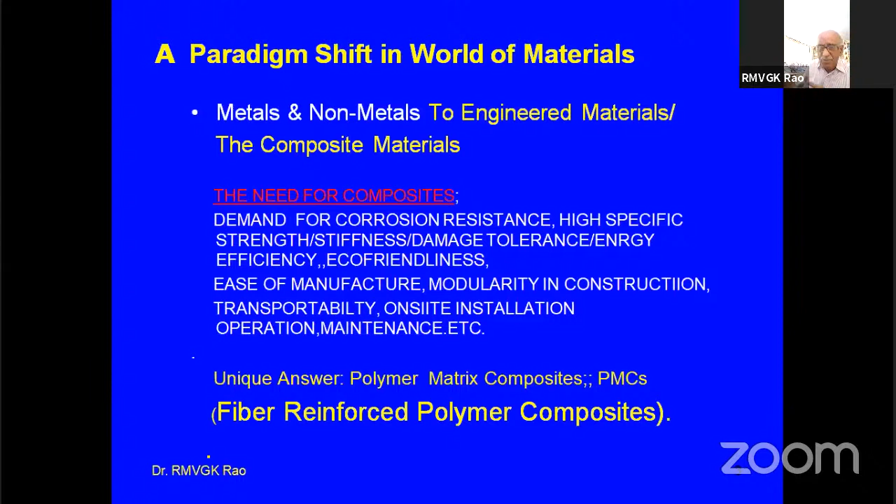Unfortunately, I'm not able to show you. I have got a small radome model which I made for ISRO, Dr. Mathurji's parent organization, some time back. Anyway, all this gives you a lot of ease of transportability and on-site installation, maintenance, etc. So we'll go on to the next slide.

But what is most crucial here is the interface. That means a very good bonding between the strong fiber and a bonding matrix. The interface is like in human relations also. If two people want to talk to each other, we need an interface, sometimes an interpreter. And now Dr. Mathurji and his team are actually the interface between me and the audience. We are actually a composite community now here.

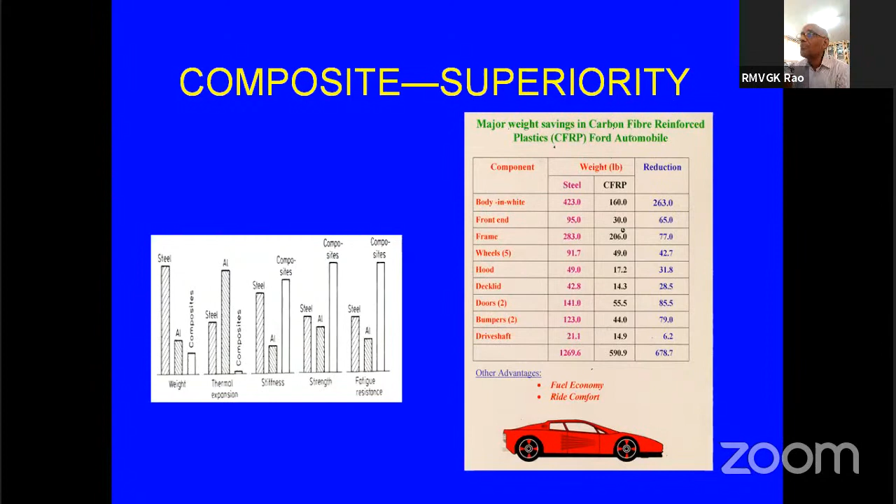In fact, the carbon-carbon composites can withstand 2,000, 3,000 degrees centigrade continuously. They are mostly used in the re-entry vehicles, the heat shields, etc., where the temperature shoots up momentarily to thousands of degrees. Only carbon-carbon composites can withstand that. And the hybrids, mixtures of all these.

That means polymer matrix composites today score when the application needs very large structures, and very large structures cannot be so easily made with ceramic or metal matrix composites. So that sums up the reason why we are today talking of the polymer matrix composites, PMCs. The next slide, slide number 7.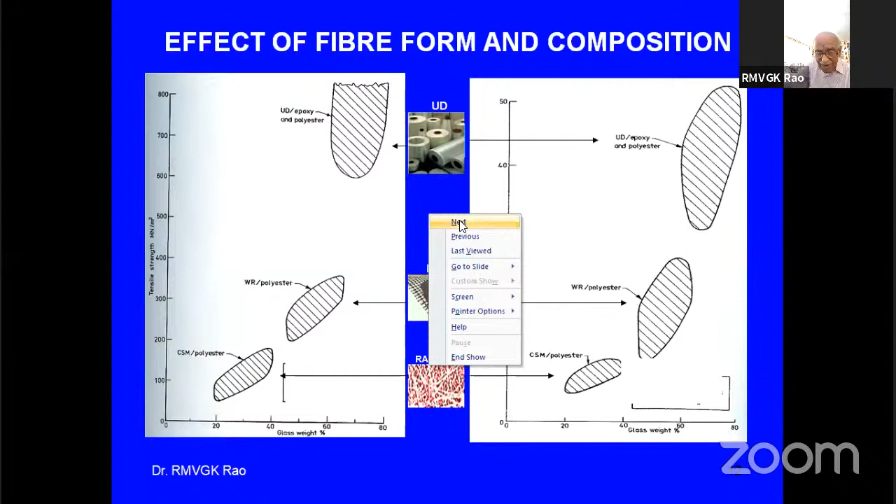That means you take your fingers like this, pull your fingers straight up. It can take load. But somebody pulls your fingers across, what happens? You can't hold them. What is holding there? Here it is only air, but in a composite, it is the matrix. So the binding matrix cannot resist loads. Therefore, in the transverse direction, the unidirectional fiber has a very, very weak strength.

In fact, this is also true with human beings. Some people are straight, honest, upright. He doesn't bend. He is very, very strict, but somewhere he fails because he doesn't have that tolerance.

So that's why the bidirectional composite, the BID, is very good in that sense. It has balanced properties in the x-axis direction, y direction, as you have seen in the previous slide. So at the extreme, it's 0 degrees. When you load it at 0 degrees along the warp direction fibers, you get some strength. And when you load it along the weft direction, 90 degrees, you get the same strength.

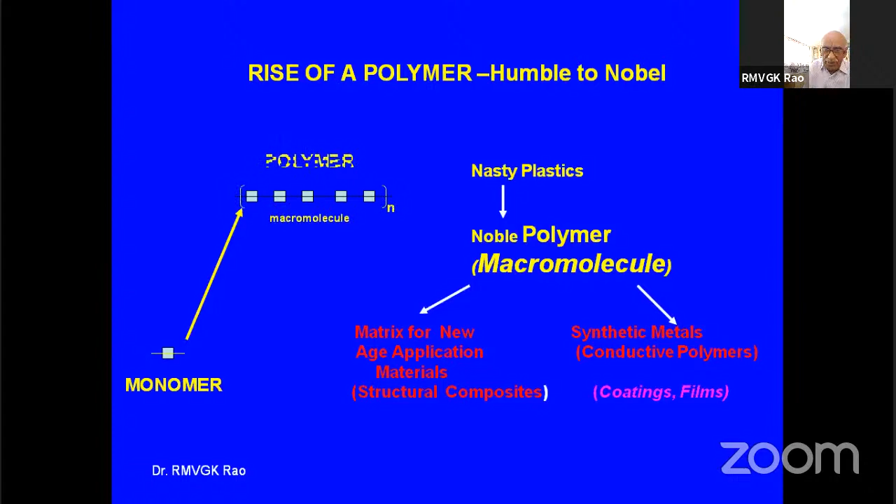In fact, the interesting thing about Kevlar fiber is that we are all familiar with nylon. Nylon is actually New York and London. I don't know how many people know. Two industries from New York and London brought out Carothers' experiments, nylon. But the important thing here is that it is an aliphatic polyamide. Now this aramid is an aromatic

polymeric fiber, and the K in Kevlar is the first letter of a lady who actually invented it as a chemist at DuPont. The DuPont trade name is Kevlar. So all the ladies should be happy. One of the greatest contributions to composites comes from a lady. That is, she is some Stephanie, some Kwolek or something like that.

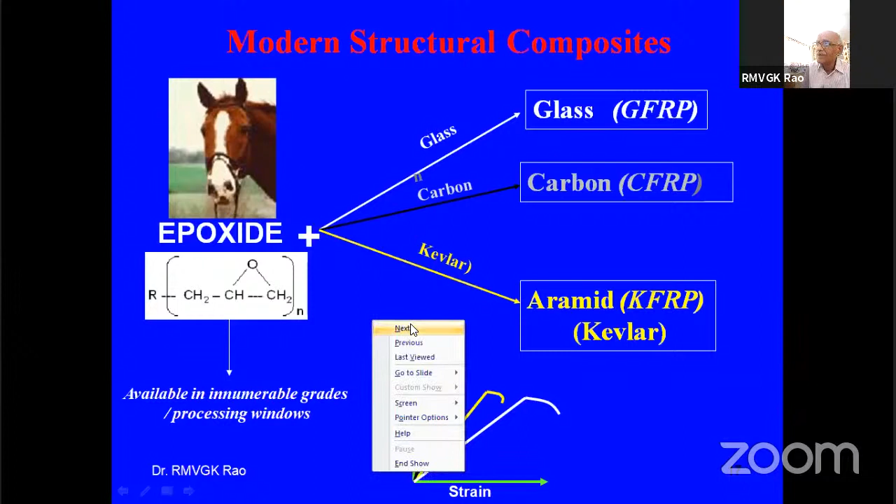So the desirability is that you should have a high glass transition temperature, because glass transition temperature is a measure of the service temperature limit of the part which you are making out of this composite. Therefore, that is where the matrix enters into the picture. Its importance also comes out. I'll show you in the next few slides.

But the reality is that the glass transition temperature TG goes up as you cross-link the molecule more and more with different hardeners. Therefore, you get higher and higher service temperature for the product. But the moisture is a culprit. It pulls it down. That's why I call it a push-pull mechanism, like a push-pull train.

But it's not a push-pull train from Bangalore to Mysore. All the way, it pushes from behind and it pulls, because when you go from Bangalore to Mysore, you go down. Mysore to Bangalore, you go up. So, but here, one pushes it up, one pulls it down.

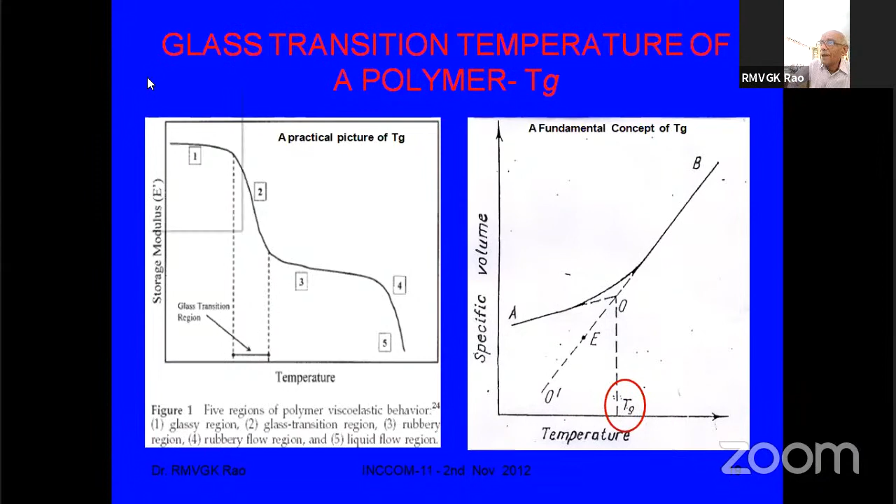So we have done a lot of studies in Hansa on this. Hansa taught us a lot of stories. Now, putting in equation, the glass transition temperature TG versus the composite performance, it tells us how to choose a matrix. A thumb rule: the TG dry, that means the as-cured, as-solidified polymer matrix composite glass transition temperature measured by thermal analysis techniques, should be at least 60 degrees above the service temperature.

That means if your service temperature, for example, Hansa, white painted Hansa, by Kirchhoff's laws of radiation, they have found that the white body's maximum skin temperature, when the ambient is about 50 or 60 degrees, is about 60. But I need to have a glass transition temperature of the matrix of 60 plus 60, because that extra 60 is to account for the drop in the TG. We have seen the previous curve. TG comes down with moisture absorption.

Moisture absorption is to be reduced, but cannot be avoided totally, because when a flight vehicle or a vehicle in the open environment performs for so many years, it will pick up some moisture. So that moisture is bringing down the TG, and if your ambient temperature goes above TG, then it is a disaster, whether an aircraft or even a ground-based radar. Therefore, that margin of 60 degrees should be there, and there are processing variables.

I make a component using a process sheet, same material. You make it, but certainly they're bound to be different because composites are heterogeneous, multi-phase materials. So we cannot establish it exactly, repeat it. Even in twins, we see there are differences. Okay. Anyway, now there are two important stories here to connect us: one is an adventure, the other is a disaster, the other is a disaster converted into a success.

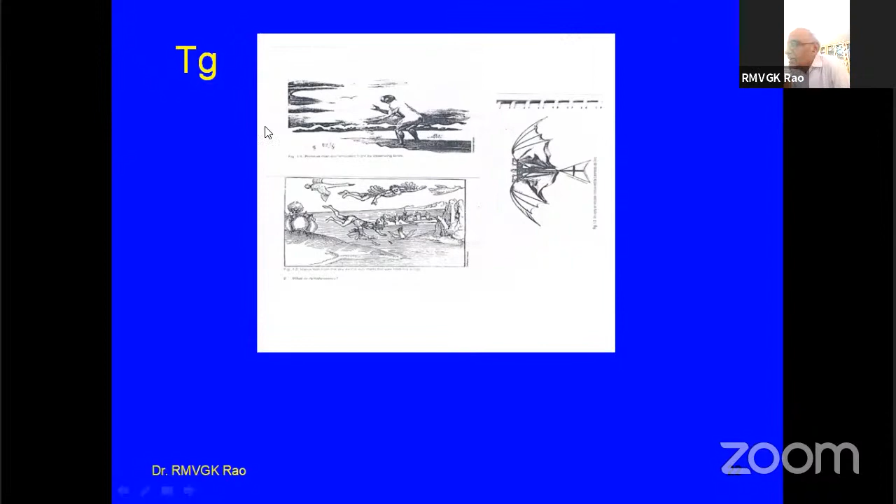And alas, what happens, the wax melts. Here it is the glass transition temperature, because the thermoset is something like the wax melting. If you don't design your matrix much above the service temperature, that is TG plus 60, a similar thing can happen. And with moisture absorption, it is disastrous. Now we'll see the next slide. This is a beautiful slide. 1982, the Columbia Space Shuttle carrying our three great astronauts.

Now the spacecraft, after it entered space, if you can read it, it started twisting strangely in flight. They were wondering, because the ground control people are here and the spacecraft is thousands of kilometers away. Then they suddenly thought, there must be a problem of moisture absorption, because the spacecraft was kept outside in the open. There was heavy rain that lashed for a few hours, and the front is covered by porous carbon-carbon heat shield tiles. So they are porous, and moisture did what it does.

Then the flight director, Harold Draughon. This I picked up from the Deccan Herald local newspaper, 29 June 1982, ahead of my submission of thesis in 1983 on moisture absorption, luckily for me. Immediately they thought, if the moisture absorption theory is correct, then by maneuvering it from the ground, spending some extra energy, they turned the heat shield toward the sun for 10 hours and evaporated the moisture, because the sun's heat will evaporate it. They made some mental calculus.

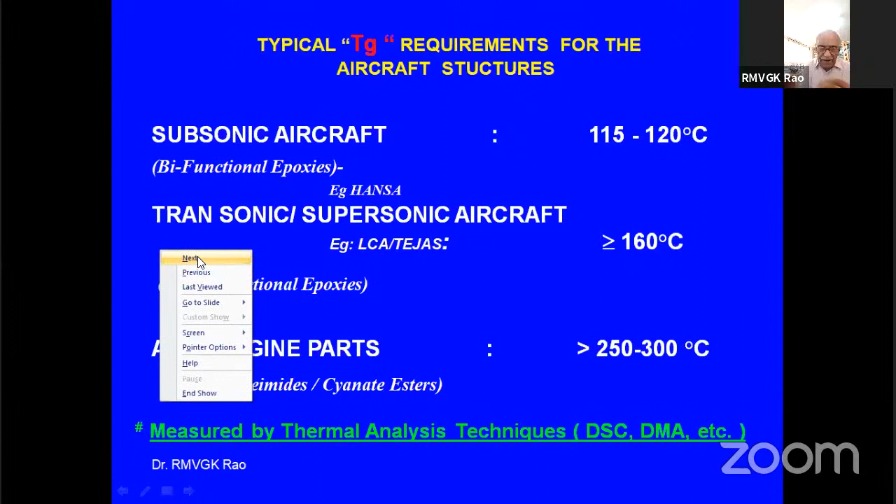Now I'll go to the 26th slide, where we will talk a little bit about design. I'm not a designer, not an analyst, but because of my long and strong association with many colleagues who are world-class experts in mechanical design, machine design, finite element analysis, CFD, and engineering services, and my own team of chemists, engineers, and wonderful technical staff, masters in the art of fabricating things with utmost care, we had put together R&D under one roof, that is the FRP division, which I left after superannuation.

So the data that we generate is at the laminate level in the middle. But the design analysis people want a single layer property. That means the property of the lamina goes into the design of the structures, the actual shape, and the property of the laminate gives you a lot of design data from which you develop what are called design allowables. So in the next few slides, we'll see that. These are all the various test specimens for generating mechanical property data.

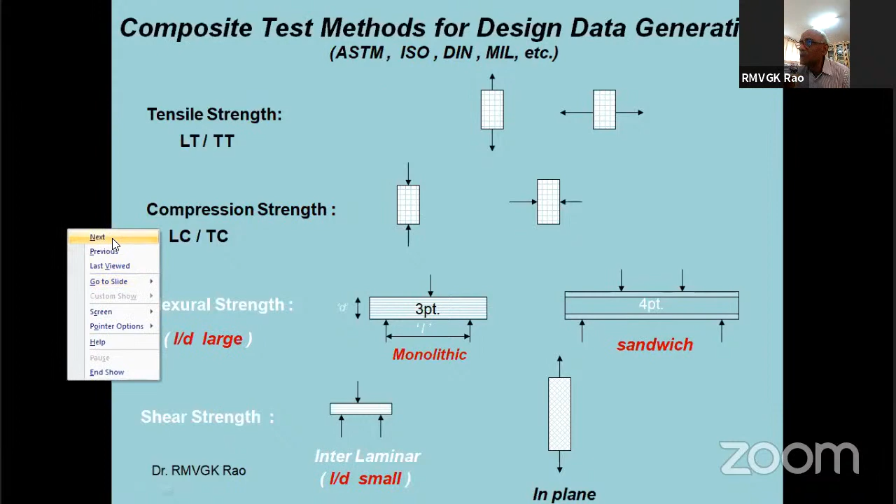So, design concerns for aircraft composites. Design allowables are of 2 types: the A basis allowables and the B basis allowables. What is an A basis allowable? If you take 100 specimens, 99 out of 100 should pass with 95% confidence. And they are used in primary structures, very stringent. That means spars, attachment points, critical bulkheads. If a failure takes place there, the whole aircraft fails and safety is jeopardized.

B basis allowables are, instead of 99 out of 100, 90 need to pass, with 95% confidence limits. And such design data, B basis allowables, are used in wing skins and control surfaces, which are secondary. Sometimes the failure of a wing skin or control surface doesn't automatically put the aircraft in danger. There'll be enough time. Not that it should happen anyway. So for A basis, you have to test a large population of specimens. For B basis, you test a limited number.

But when you are making aircraft, producing a number of them, you cannot do this once you are established. You only do a subset, batch to batch, so that you don't do it for everything. In fact, even when we made the radome for the Doppler weather radar at ISTRAC, 12.88 meter diameter, which has 666 panels for the Mark II version, there are about 5,000 stainless steel bolts. ISRO insisted that at least 50 or 100 bolts be tested again and sent to the materials lab for chemical composition.

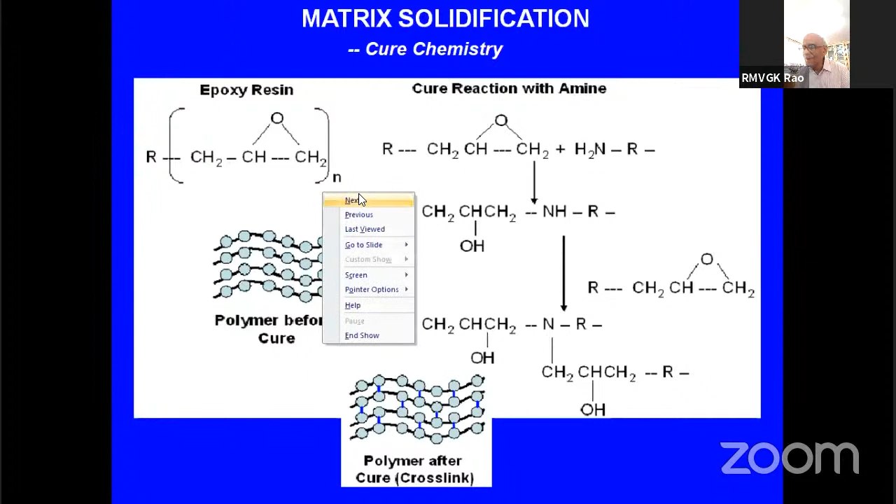Now, applications of polymer matrix composites. Here, I'm not going into too many, because they're vast, so many products you can show. But what is important is, broadly, you divide the applications into high volume applications and high-end applications.

The high volume is where a lot of people use them, thousands and millions of people, like automobiles, many utility items, chemical industries, domestic appliances, we know everywhere it is used, and entertainment, industrial, sports. Today, everybody is using carbon fiber rackets. The carbon fiber rackets have outdone wooden and aluminum rackets today.

So if an ordinary fellow like me plays with a carbon fiber racket against a champion holding a wooden racket, I can take one game at least, because that is the power of composites, like transport vehicles. There is a large volume consumption. But there, the cost is important, because otherwise you won't break even, because the volume of production is so high. Quality is important. There is some premium on that.

But when you go to the high-end applications like aerospace, biomedical, human implants, electronics, communications like radomes, and so many, you have to have a very high quality, reliability and repeatability of the property or performance, and finally, safety is of utmost importance in a spacecraft or an aircraft. Therefore, in high-end applications cost will not come into the picture to start with. Later, the cost may come, but if you give importance only to cost, you will be losing on other parameters.

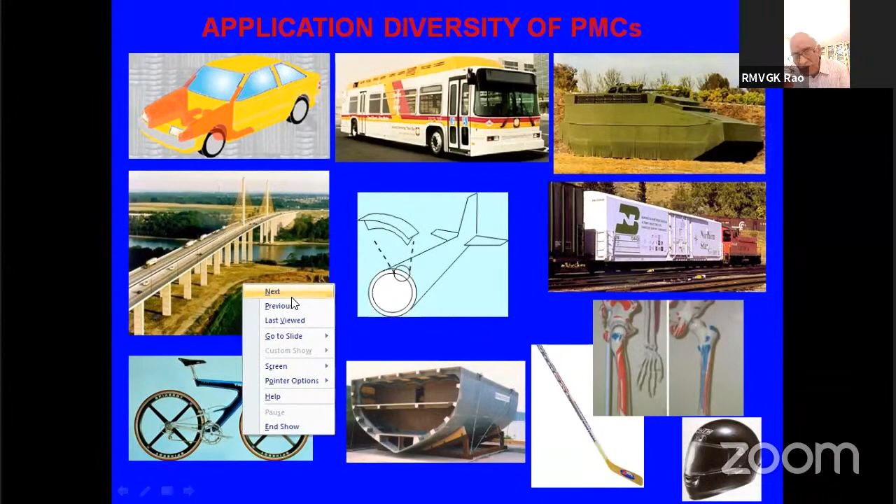Now, let us just take a small look at the emerging trends in composites. We wouldn't have come from the primitive age to today unless somebody or the other went on inventing and bringing new materials, new processes, new technologies. Nobody is satisfied. That is what the passion is. Passion drives it forward. Therefore, here, new materials.

Now we are having polyimides, with a maximum of 300 degrees glass transition. You can use it till 200, 250. What if I have a matrix material which can give me 500, 600 glass transition temperature? Can't I make it? In fact, I posed the question to many of the pure science people, some of my colleagues also. So ultra high Tg matrices. Again, you don't go into metals, then you end up with high densities and corrosion problems.

The nanostructured, and today we are talking of carbon nanotubes. The carbon nanotubes are very fine, small. They are looking like powders. And it is to the credit of NEC laboratories. A gentleman, Iijima, in electron microscopy first found them, and Professor Ajayan, now in Rice University, is working in the Nobel laureate seat. He sits there, and he has been responsible in productionization of carbon nanotubes in large scale structures.

But the important point is, if you can make carbon nanotubes in that small powder form, they won't give us reinforcement. They have to be far lengthier, like cross the critical fiber lengths. So if you can make carbon nanotubes into ropes and long fibers like the glass fiber or carbon, you can make your aircraft or spacecraft a lot lighter. And because carbon nanotubes modulus is 1 terapascal, that is 1000 gigapascal. The best of carbon fibers today, lengthy fibers, range from 250 to 400, 500 modulus, or 600 at best, but they're very expensive, not accessible to everyone.

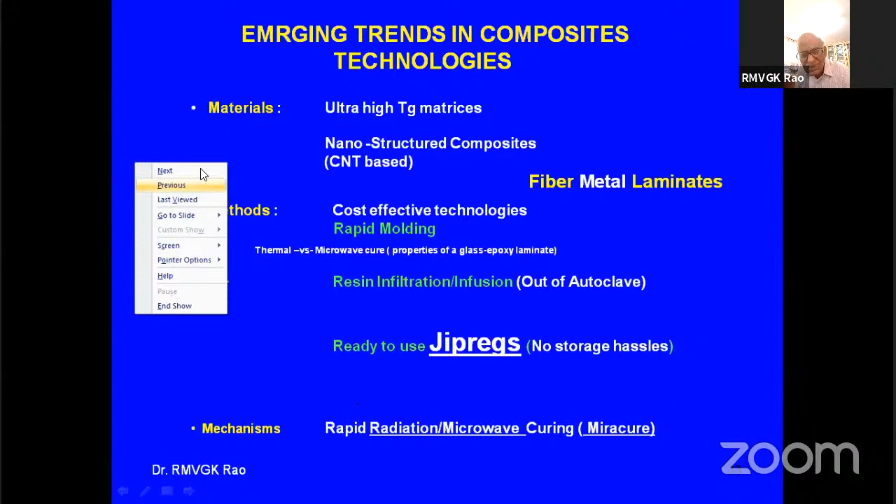It incorporates what is called GLARE, glass reinforced aluminum. This is the result of a PhD of a student from Holland, mind you. Have you done a PhD where such a material has been introduced in any of the structures? Now this aircraft is a direct success, A380, Airbus.

Now I'm coming to the last few slides. My own philosophy is that science is pursued with a passion, because I do what I want. It's up to others to get what they want. But pure research in its pristine form is very important, because not all people can go to the fundamentals and study the principles of science. But that mere passion, if it ends up in research, publication of papers, guiding, you get a lot of laurels and awards, but research becomes open-ended, it diverges. But if you add to passion a bit of purpose, societal, of course, it becomes application-oriented research.

Madhurji, are you able to see the slide now? Yes. Okay, thank you. Once in a while I interrupted, otherwise you had to do it for me.

So then if you add engineering to that, your mechanical, electrical, everything comes into the picture. Even electromagnetics steps in when it comes to radome. On radome itself, I can talk for days and days. We have wonderful work at NAL. So if you add engineering to that, now it is technology.

It is not moving. I think there is no other slide other than this. This may be the last one. Sir?

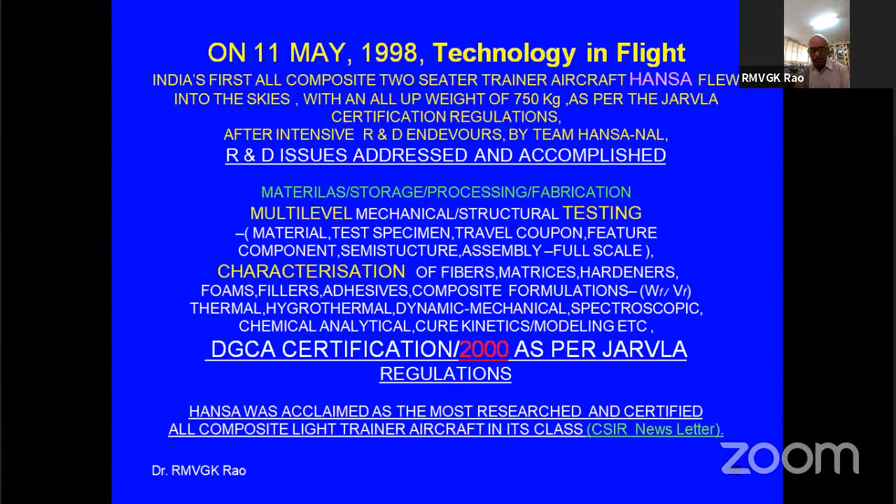So now, technology in flight, that is my final slide. So you can make a technology, now you have to show it flying. The proof of the pudding is in the eating. Now you see, I hope it will work now. Yes, technology to the aircraft. Hansa is there. Sound, I don't have a sound here.

I have only a fan behind me. No, we are hearing you, sir. Once more. What happened? We are seeing Hansa moving. Do you have a sound there? Sound is there, something in background. But it is flying, I'm happy. Sometimes it refuses to fly, it is shy of flying. It's a movie, from that day when it flew in 1998 from HAL ground. We are getting only a photo of that, though.

In fact, today I don't have any hesitation to say I whistled, actually my childhood habit. And my director, normally he's very serious, with a smile he patted me.

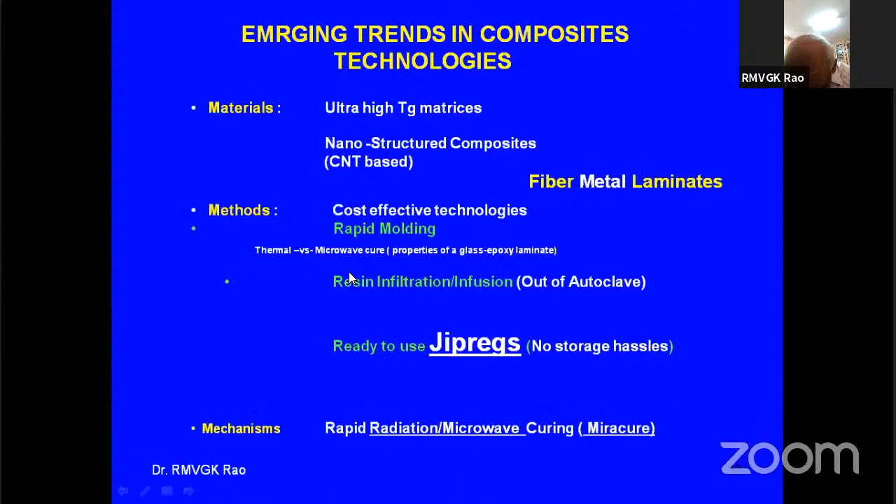Sir, one thing you talked about is the design safety margin we take for designing the components or the complete machine, like for aircraft or aeronautical applications of composites. As I remember, 99% of samples for mechanical strength must pass. And for non-aeronautical, 95% is allowed. I don't say non-aeronautical, aeronautical only, but secondary structures.

Secondary structures, okay. My point is whether during testing, NDT, non-destructive testing, can be of help here, without a destructive test by cutting dumbbell-shaped samples and straight rectangular samples for compression and so on. Whether NDT, meaning ultrasonic or maybe X-ray, can be used for checking the defects inside, and some decision can be taken. Yeah, it's a very good question.

In fact, we did NDT, but we don't do it on the specimens. We have done it on sandwich structures with PVC foam and glass epoxy skins, to see whether the skin to foam core bonding is good. We did it on small panels, then on the whole component. About 200 critical points we take. Then we have a standard reference with the best bonding, compare with that number and make a plot. If within that number, the aircraft quality is uniform.

And we use what is called the coin tap technique, mechanized. Earlier, we used to take a 1 rupee coin and tap it. If there's a hollow tone, you know there is a defect, and you can inject resin and close it. Later we imported a 5-6 lakh machine from Japan; I forgot the name. It is automatic, it will hit, and any hollow gives a number. That number we put against a standard reference.